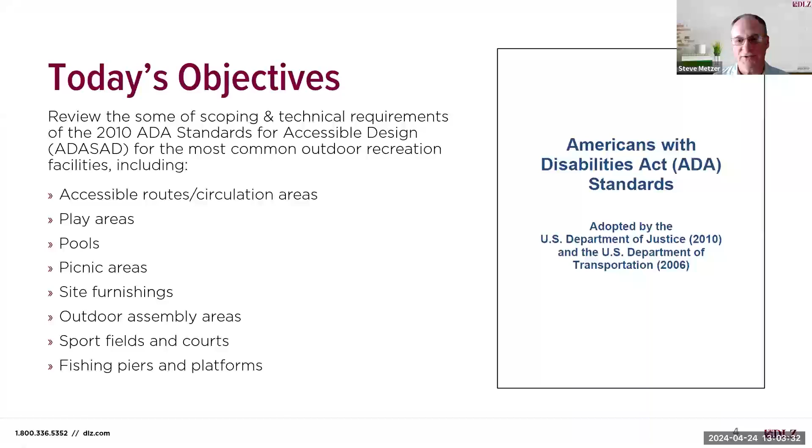A few more items to pass along. Please note that nothing presented should be interpreted as legal advice or binding interpretation of the ADA standards. That's something that we all need to leave up to the regulatory agencies and the courts. However, I am providing my opinion and interpretation based on over 15 years of work in this field.

As noted on the previous slide, no discussion for some of the less common recreation facilities is included, such as recreation boating, amusement rides, golf or miniature golf, and others, which does not minimize the importance of access to those facilities as well, but we do have time constraints. Since each location and conditions at locations vary, the information presented may not fully apply to all situations or any particular situation of one of your locations.

No other requirements that may apply are included, including any state or local accessibility requirements, other than maybe a few instances where I will mention the ICC A117 accessibility code and the sections of the ABA standards that have been adopted, sections 1011 through 1019, for some of the specialized recreation facilities.

Interpretation of the 2010 ADA standards does differ on some aspects, so any questions with potential legal repercussions really should be directed to the U.S. Department of Justice technical assistance staff.

Since our goal should always be to maximize accessibility and opportunities for everyone, I may suggest exceeding, or at least considering to exceed, the minimum requirements at many of the amenities that we'll discuss today, especially where the effort and cost involved is minimal for a large benefit.

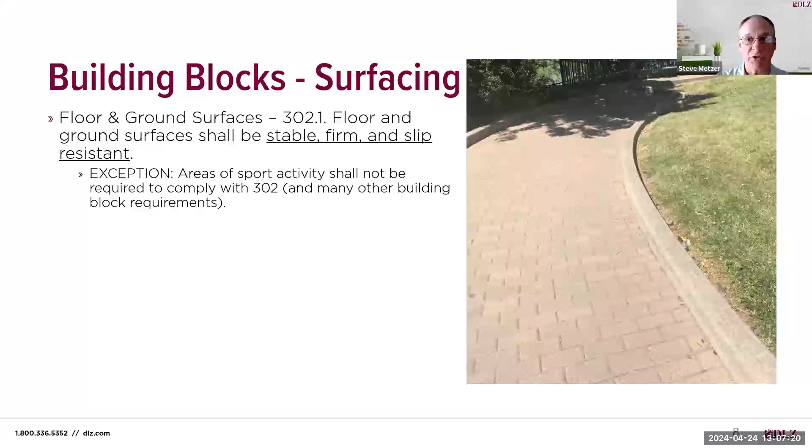302.3 includes requirements for openings in those ground surfaces along accessible routes, which cannot have separations or openings of more than 1/2 inch. Things like joint separations in concrete, cracking, and utility covers are the most common items that violate this requirement and can cause issues for mobility device users especially.

303 provides the requirements for level changes, which are allowed to be up to 1/4 inch maximum if that change is vertical and can be up to 1/2 inch if it is beveled. Elevation changes over 1/2 inch must be ramped and can often be made compliant by grinding a smooth transition.

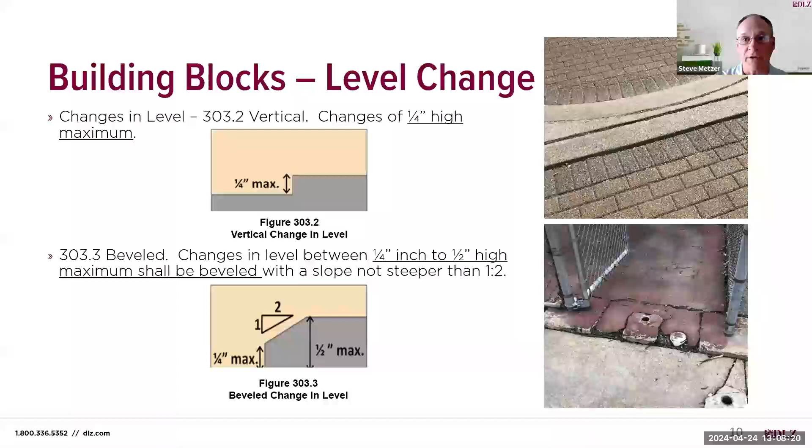While you can get changes in level at any location along an accessible route, they tend to be most common where you transition from one material to another, like from concrete to brick or asphalt. Vertical changes in level can not only be a barrier to wheelchair users, but also be a trip hazard to anyone, including persons that are ambulatory, whether they use a mobility aid or not.

304 includes requirements for turning spaces, which permit especially a wheelchair user to perform changes in direction at various site features. You need to provide either a 60-inch diameter circle or a compliant T-shaped turning space for wheelchairs. If you have ever reviewed architectural plans, you often see this type of circle in especially smaller rooms like family restrooms to demonstrate that there is a turning space provided.

The new ICC building code is going to include a requirement for new construction that increases the diameter to 67 inches. This is being done to accommodate scooters, which are much more commonly used now than wheelchairs, as has been done in the past. And scooters can often have a very difficult time maneuvering within a 60-inch diameter circle.

Existing facilities will be allowed to maintain that 60-inch diameter, but consideration should always be given to trying to maximize access wherever possible for alterations.

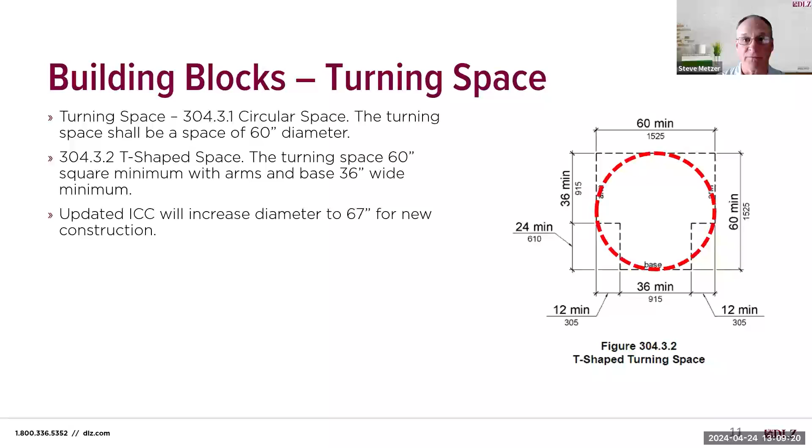305 covers clear spaces, which are required at amenities at nearly every recreation facility to be discussed later, and are essential for amenities to be accessed or reached. Clear spaces are typically 30 inches by 48 inches, but in some locations may be required to be larger, and those will be discussed where applicable.

Clear spaces may be required to be either for a forward or parallel approach, depending on what the feature requires or allows. All clear spaces must be directly connected to a compliant accessible route or circulation area, which includes the earlier building block requirement for surfacing and other aspects of accessible routes that are coming up.

306 covers both knee and toe clearance. Let's start first with toe clearance, which is found in 306.2. Without going into too much detail, toe clearance is typically 9 inches high minimum above the ground for a maximum depth of 6 inches. The depth requirement is 17 to 25 inches and it requires a width of 30 inches. These clearances allow a person in a wheelchair to be able to pull up and use an amenity.

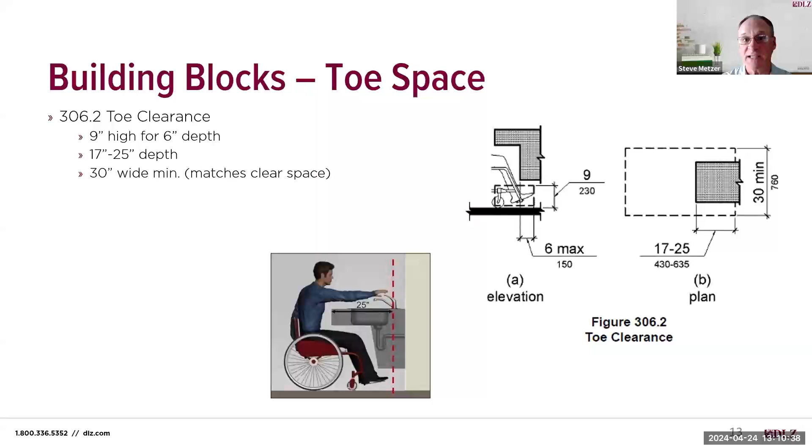You will note that this is one instance where more is not always better, as if you provide a device that is too deep, and in this case over 25 inches deep, the knee and toe space depth may not allow for the operable parts to be within reach ranges.

Knee clearance, which is found in 306.3, mirrors many of the same requirements as toe space, but also includes a minimum knee space depth of 8 inches at 27 inches high and 11 inches minimum depth at 9 inches high. These dimensions all create this odd-shaped polygon you see in the figure on the bottom left.

Again, we see the maximum depth restriction to ensure users can reach operable parts. This restriction often precludes deep sinks like those found at hospitals from being compliant. While the knee and toe space below can be expansive, they are often so deep that it is difficult for a person in a wheelchair to reach the faucet controls.

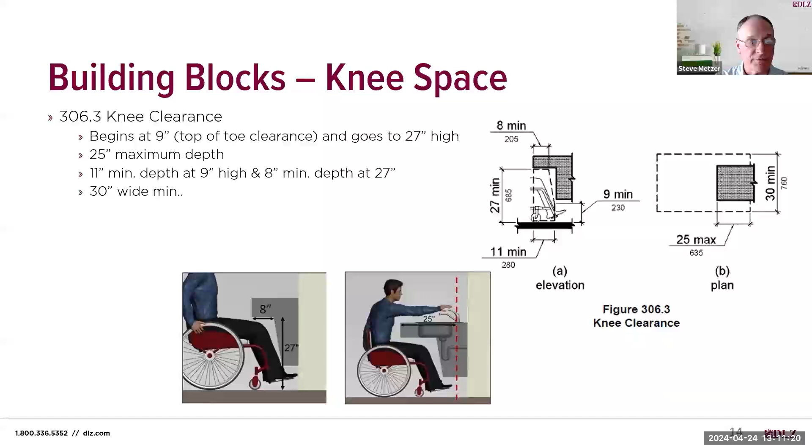307 covers protruding objects. Any object that by definition protrudes more than 4 inches between 27 inches and 80 inches is considered a protruding object and a potential hazard, particularly to persons with vision loss. The requirement is not only along the accessible route, but also within all circulation areas of a site. Some of the most common protruding objects at outdoor facilities include hanging flower baskets, drinking fountains, vegetation overhanging a sidewalk, and similar types of items.

There are separate requirements for post-mounted objects like those found on a sign pole, which are allowed to be up to 12 inches of protrusion. Post-mounted protrusions are much more common outdoors than indoors, but also much more so in the right-of-way than on park sites. Vertical clearance in all locations is required to be a minimum of 80 inches high.

Objects like open staircases or bleachers that are not protected underneath can be a significant hazard if there is no cane detectable barrier to protect the open sides. Fortunately, adding something as simple as a railing or other cane detectable barrier or object to protect those protruding objects or those that lack the minimum vertical clearance is typically fairly easy and low cost.

308 covers reach ranges, which apply to a variety of features on all sites and can be either for a forward reach or a side reach, again, depending on the situation and how the item would normally be expected to be used. Let's start first with unobstructed forward reach, which means the item to be reached can be approached from the front and there is no obstruction to reach over or restrict access.

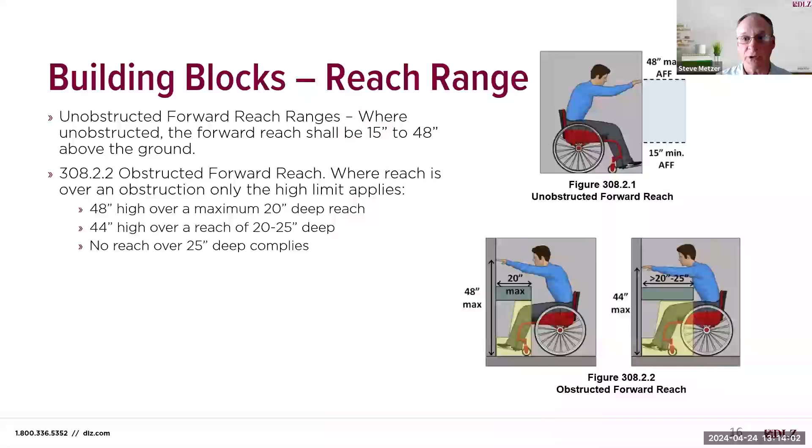Some items may be accessed with a side reach, which has the same 15 to 48 inch height for unobstructed reach, but the side reach over an obstruction that can be up to 34 inches high and up to 10 inches deep, again, does not change that maximum 48 inch reach range. However, as that obstruction starts to increase, being over 10 inches deep and up to 24 inches deep, the maximum reach range permitted is only 46 inches. Items requiring a side reach cannot be placed at locations with over a 24-inch deep reach.

Here's a good example from a recent evaluation I did. It's pretty common. This apartment complex allows pets and has many trash receptacles and dog waste dispensers on the site, all at the same location. But many of them are not usable since they are located in grass areas, which is not a compliant surface as we talked about earlier, not being firm, stable, and slip resistant.

While the trash can height meets the requirements for reach range height, the bag dispenser operable part is at 50 inches high. Both the dispenser and the trash that are located on that same post are over 42 inches away from the sidewalk, which exceeds the 24-inch maximum for side reach from the sidewalk. A person in a wheelchair with a dog or even a service animal would not be able to access either the dispenser or the trash can in this location.

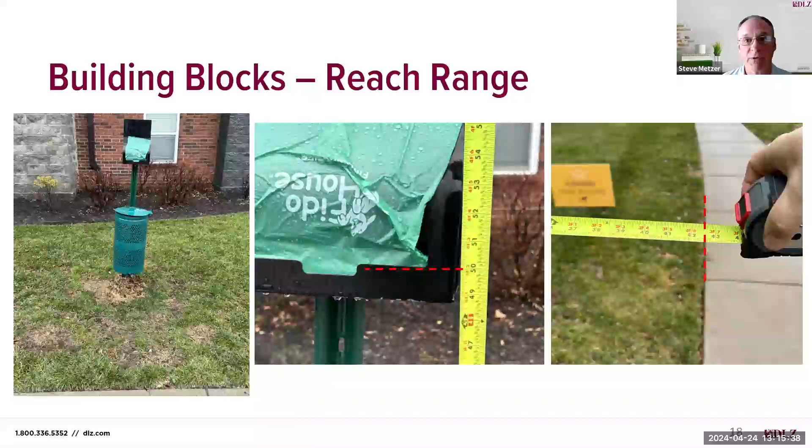There really is no reason why these items should not be corrected by moving that post to be within 24 inches of the sidewalk and also lower that dispenser to be at 48-inch maximum height if it reaches the unobstructed criteria, or 46 inches if it does not.

The last building block of Chapter 3 is Section 309, which includes requirements for operable parts. The requirement for operable parts of amenities is that they cannot require complex hand movements and must be operable with one hand. Complex hand movements are generally defined as performing multiple actions with that same hand, such as grasping and twisting, or grasping and pulling or lifting. Perhaps the best test of compliance of operable parts is to try to operate the item with a closed fist. This would simulate someone with an upper body mobility issue like arthritis or something similar, trying to operate that part.

In addition to the type of operation required, the force required to operate a part cannot exceed 5 pounds. The most common operable parts issues are with round doorknobs and faucet controls that require grasping and twisting, or vending machine controls that require tight grasping and pulling of a knob to dispense product.

For outdoor recreation facilities, one of the most common non-compliant operable parts that we see are latches at gates to aquatic facilities, whether to the perimeter of a pool or to a child's wading pool area. The required grasping and lifting operation violates the requirements of 309 for operable parts in most cases. This can usually easily be fixed by switching out the knob or by adding a small bar or lever that can be lifted with a closed fist.

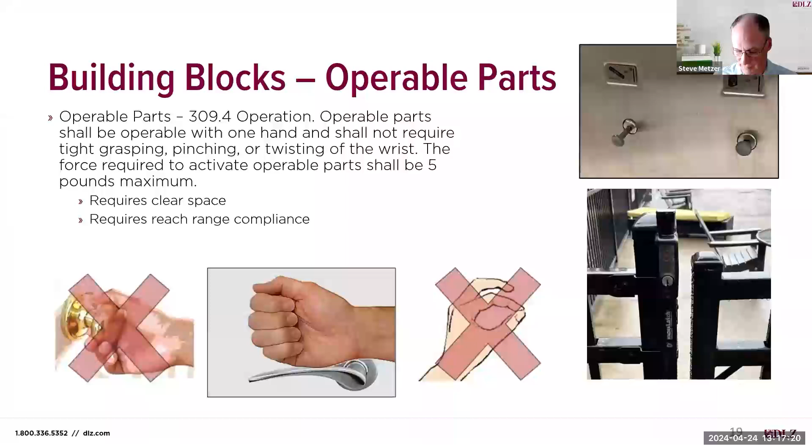In addition, at least one of each item on all sites must be also connected to an accessible route, and often more than one is required to be on an accessible route. And I'll talk about each one of those on a case-by-case basis. One of the most common issues we see on park sites is non-compliance with 206.2.12, which requires at least one accessible route be directly connected to both sides of the court for court sports like basketball, tennis, and pickleball, and also a lack of accessible routes to many sport field perimeters.

Here's a good example of a smaller park that provides all the required accessible routes. This site includes the community center with parking lot and connection from the parking and the community center to the right-of-way sidewalk, perimeter walking path and benches, play area, and boundary of both the tennis courts and the one basketball court on the site.

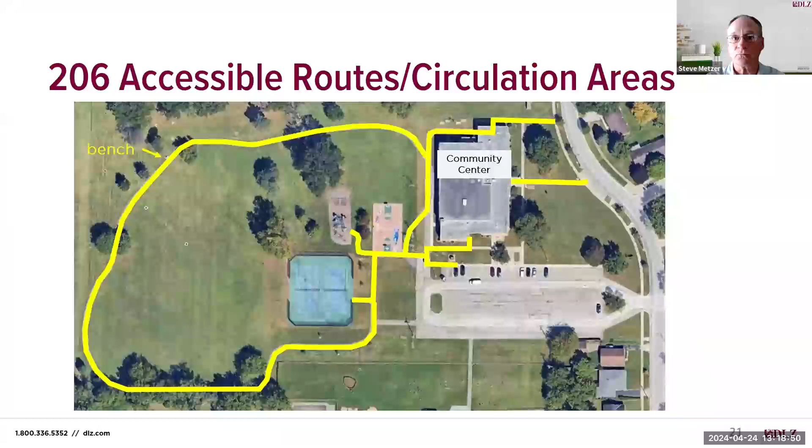Here's another not so good example of a much smaller park that provides none of the required connections other than the short interior path to the right-of-way sidewalks that bisects this park. There is no connection to the boundary of either one of the two play areas, the covered picnic shelter, the benches near those play areas where a parent would sit and watch their children play, or the drinking fountain on the site.

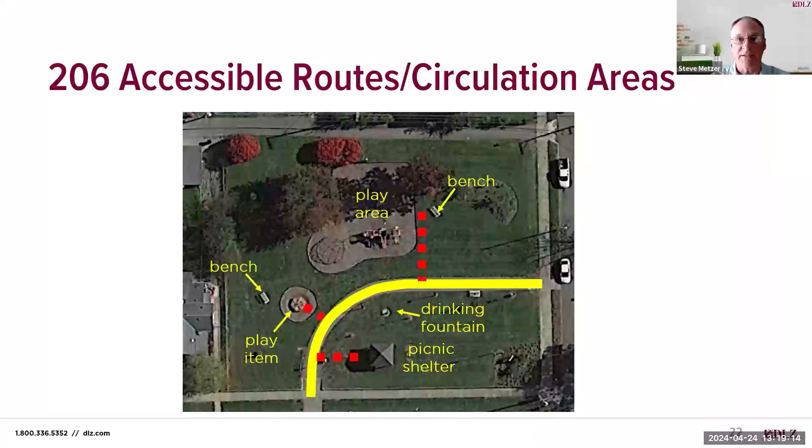Walking surfaces of accessible routes need to be a compliant surface, if you remember the firm, stable, slip resistant building block, and has limits for running slope of 5% maximum, cross slope of 2.1% maximum, with no level changes, have a minimum clear width of 36 inches, and a passing space that's 60 inches wide every 200 feet.

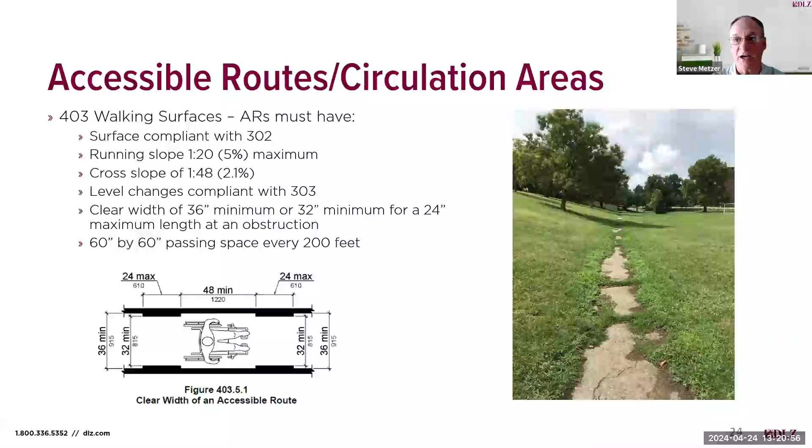There is an allowance at some obstructions to narrow the accessible route to 32 inches in width, but only for a 24-inch distance. The new building code is going to include a requirement for 48 inches of width for accessible routes for new construction. We're not quite sure yet if that's going to apply to exterior sites, but I assume it will, so continue to watch for more information to come on that issue, and when it is published, I will certainly pass that along.

Okay, let's get to the first specific type of recreation facility, and one that is found in some way at nearly every park: play areas. The ADA standards require in 206.2.17 that play areas comply not only with all provisions of Chapter 4 for accessible routes, including all the slopes and surfacing and level changes that I've covered in the building blocks, but also that at least one accessible route be provided to the boundary of and within the play area.

There are some modifications to the accessible route required by 1008.2, including 1008.2.4.1, which requires that within a play area, the ground level accessible route is required to be 60 inches in width to provide that turning space building block. So if you think about a child that would travel from one play amenity to maybe a swing, if you don't provide a 60-inch width, that person may not be able to utilize the ability to turn and go to another play component. So that's why the 60-inch width is required within the play area.

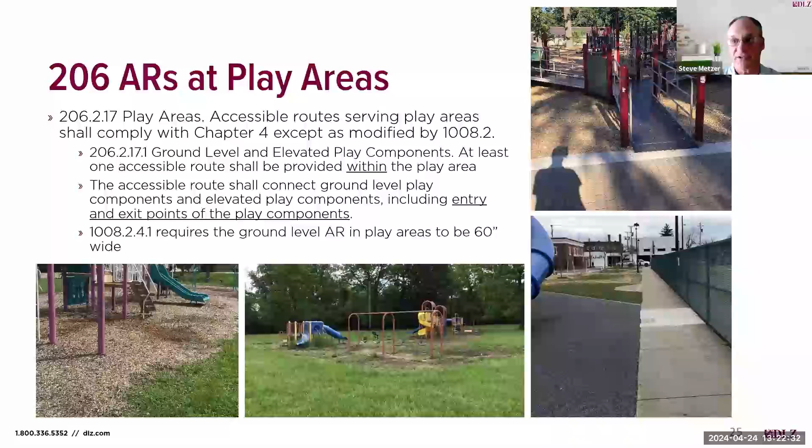As we dive deeper into play areas, I want to ensure that we're all on the same page related to a couple of the common terms. First is play component, which is simply just that, something used for play, socialization, or learning, and which can be either manufactured or natural, standalone, or part of a play structure. Play components don't include some of the construction features like the transfer system or steps or decks or roofs or ramps or bridges or anything structural in most cases.

A ground play element or ground level play component is a play component that is both approached and exited at the ground level. Elevated play components are approached either above or below grade and are part of a larger play structure that consists of 2 or more play components. So the slides that follow will hopefully clarify those differences and make it a little bit more apparent of what qualifies as either a ground or an elevated play component.

Within the play area, there are also often a number of use zones, which is the ground level area beneath and immediately adjacent to a structure or play equipment that is designed for circulation around that equipment and where it is predicted that a user would land if they were to fall or exit from the play equipment. These use zones typically are required to provide a surface that protects anyone that may fall and also often be an accessible surface.

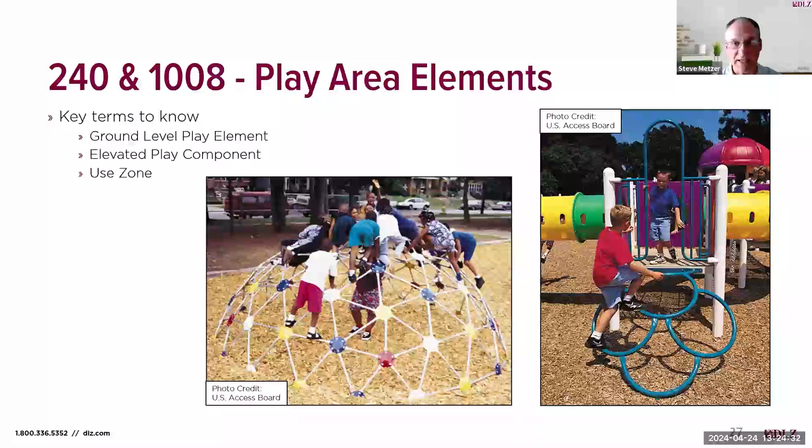Note that play areas designed specifically for children under the age of 2 are mostly exempt from the standards. It's assumed that parents or other adults would assist children of that age, but it certainly is still best practice to try to provide accessible surfaces to the greatest extent possible, even in those exempted areas.

The standards apply to each and every separate play area. When evaluating those areas with play equipment, play areas should be considered separate if they are either designed for different age levels or if they are geographically separated on a site and not directly connected in any way. While you can focus your accessibility efforts on one play area at a time, ultimately your goal needs to be full compliance at all play areas.

We strongly recommended that this client consider reconfiguring their park to consolidate the play items into fewer different areas and allow for better compliance with accessibility requirements for the numbers and types at each location. By doing so, they would also open up some open space that they could use for other items at the park for adults and other users of that facility.

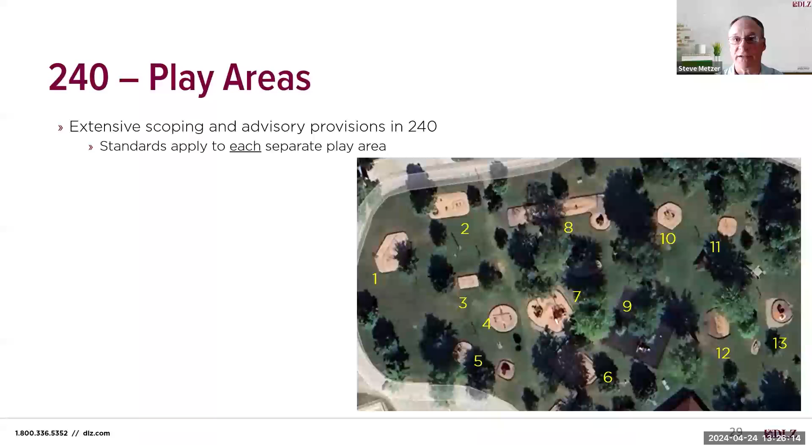The ADA standards reference a number of very important standards of the American Society for Testing and Materials related to both safety and accessibility. I'm not going to cover those in detail other than to state that they are a requirement and that there are very few surfaces that can meet the requirements for both fall safety by being soft and accessibility by being firm, stable, and slip resistant, as we've talked about.

Engineered wood fiber can meet both requirements and is less expensive than poured rubber, but it requires regular maintenance to maintain accessibility, sometimes as much as weekly or maybe even every couple of days. Surfaces like regular mulch, wood chips, shredded rubber tires, pea gravel, and many others that we see used do not meet one or both of the requirements for either safety or accessibility.

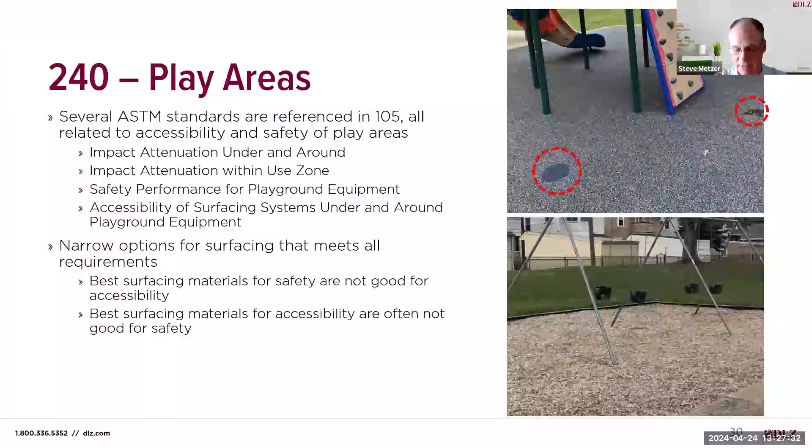To ensure equal opportunities for all abilities, Table 240.2.1.2 includes the requirements for the number and types of ground play elements required to be provided and located on an accessible route, which is based on the total number of elevated play components. This is to ensure that children who might not be able to use a transfer system, or if there's no ramp available, would still be able to interact with other children and play at the ground level.

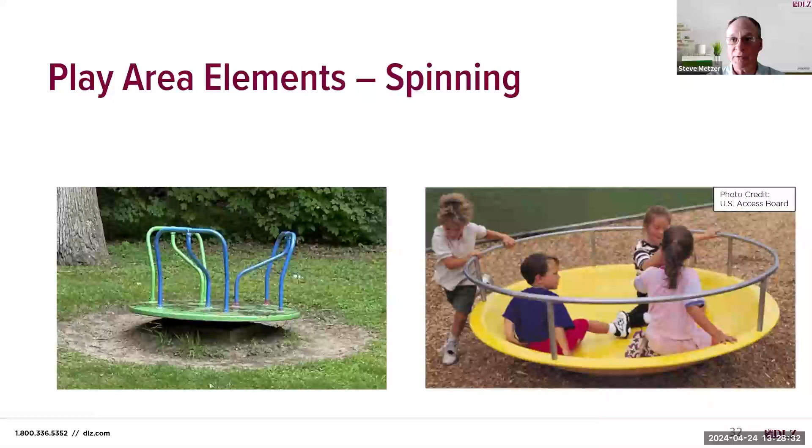You will note that the table includes both the total number of ground components and the number of different types. Let's talk about the types, and while we do that, keep in mind that some of these can be used as either ground or elevated, depending on how they are entered and exited, as we talked about earlier with the climber. When talking about the types of play elements, they are typically identified by the experience that the component is designed to provide. Examples include spinning elements, which come in a wide variety of types.

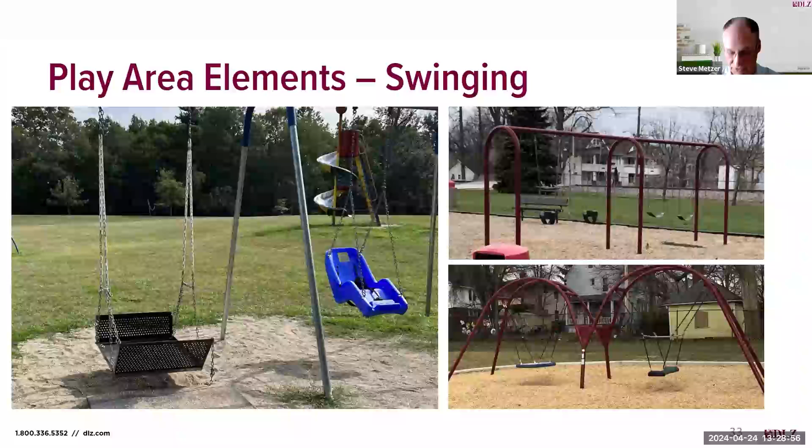One that is almost always provided are swinging components, whether a typical swing set or other types of swings. There are also swings intended for use by a child in a wheelchair, as shown in the left photograph. That front panel folds down and the size of the platform accommodates a child in a wheelchair and allows a parent or guardian to push the child right in their wheelchair on that swing.

Slides can be either ground or elevated play, again based on where they are entered and exited from. The type of slide does not matter, so a straight slide or a spiral slide are both simply slide play element types. All kinds of climbing play items are available and can be either ground level or elevated elements. A variety of rockers are also common, and nearly all of those are ground play elements that can help you meet both your number and type of ground play elements that are required.

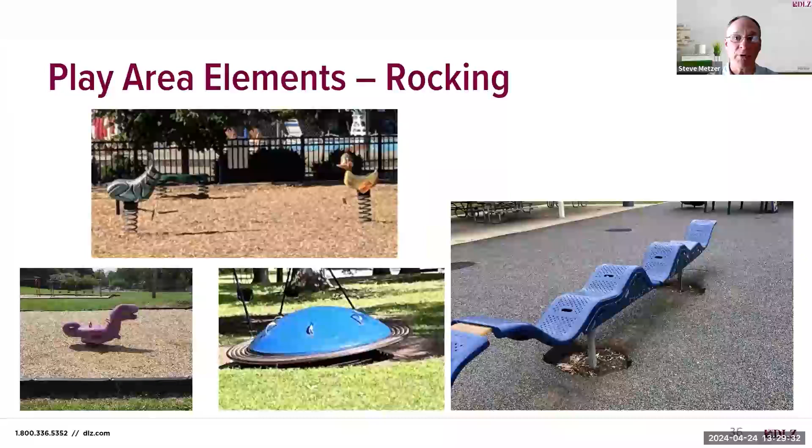Another common ground play element type are balancers, which can apply to all age groups, even senior citizens, and can also be elevated on some large structures. Perhaps one of the often overlooked opportunities for play are those elements that are educational and provide sensory, learning, some type of a table or role-playing opportunity. These are also common as both ground and elevated play elements. And there are a wide variety of other types, such as diggers and tunnels and rollers and others. Diggers and rollers are generally ground play, but a tunnel could be either type.

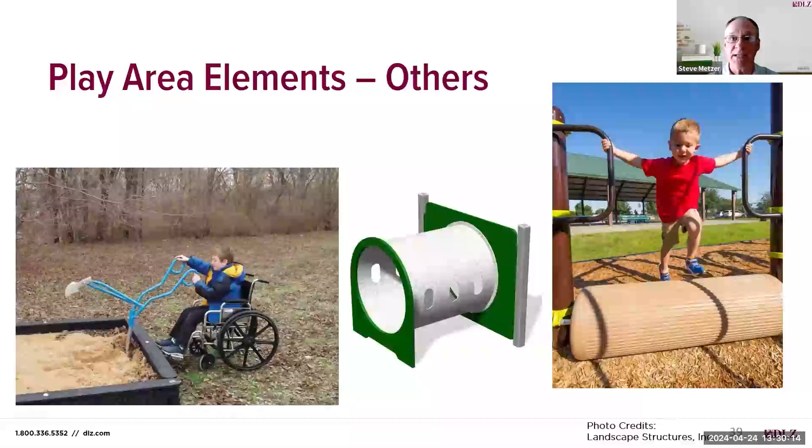It is important to note that regardless of how many and what types of elements you have, at least one of each type of ground play element must be on that compliant accessible route with proper surfacing. For many ground play elements not near a play structure, the surfacing can generally be more accessible and have fewer concerns about fall safety, but there are some ground play elements where that is still an important consideration. One thing that we're starting to see much more commonly is the use of natural play items, which simulate nature and can be of various types as well, as shown on the slide here, with simulated rocks and logs and rivers.

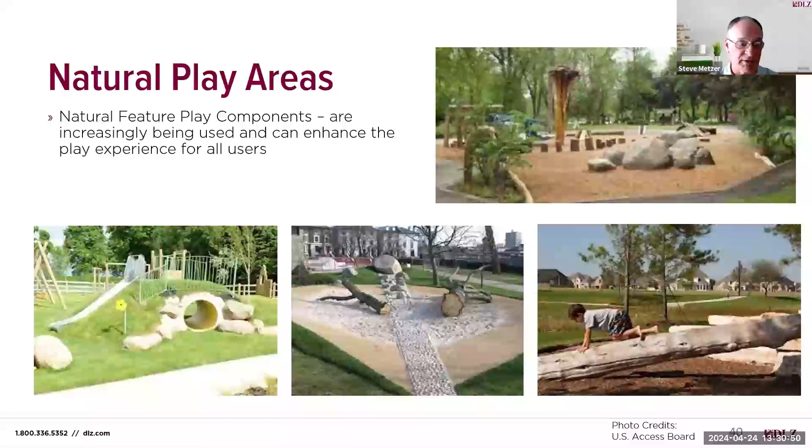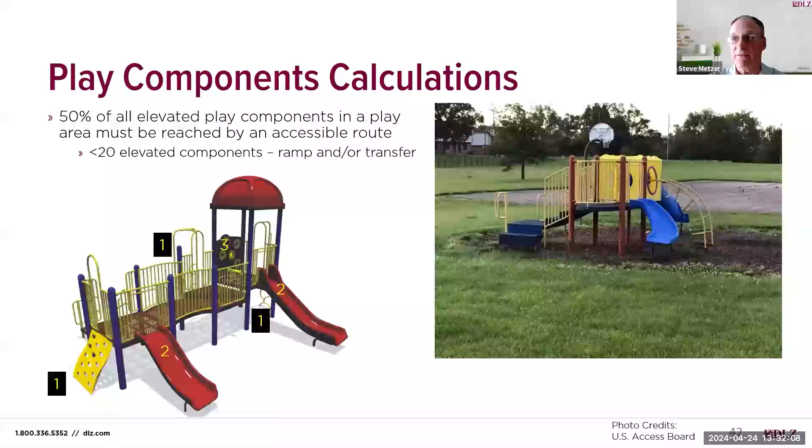There's no similar table for elevated components. It's simply that 50% of all elevated play components must be on an accessible route if there are fewer than 20 on the structure, with that route being either ramps or a transfer system of platforms and steps. For our play structure from the previous slide, since there are 6 total play elements, at least 3 must be on the elevated accessible route. And for that example, all of them are, so we meet the requirements.

When you get to those really massive play structures that have 20 or more components total, not 20 types, but 20 total elements, you have that same requirement for the elevated accessible route to connect 50% of the total, but that needs to be split to include access to 25% by ramps and up to 25% by transfer or ramps. Ramps are always better.

So for the play structure pictured, let's assume there are 24 total elevated play elements. 50% of the 24 are required to be on an accessible route, so 12. Of those 12, a minimum of 6 must be accessible by ramps. The other 6 could be accessible by ramps or by transfer platforms and steps. Essentially, you could have all 12 of them accessed by the ramp to comply if you so choose, but you could not have less than 6 of them accessible by ramps.

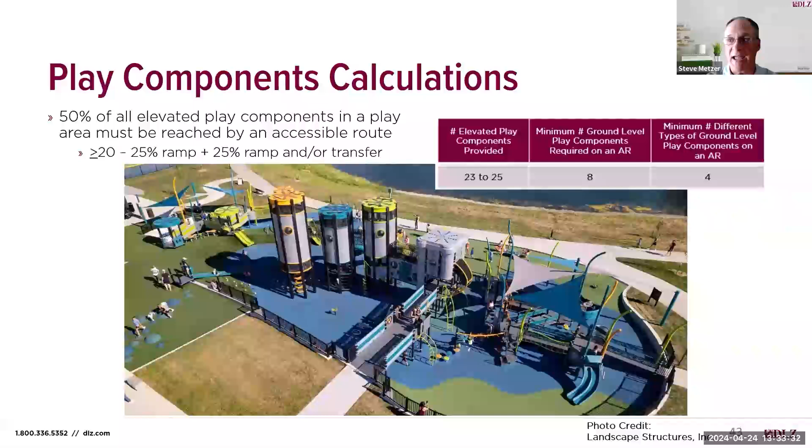Based on the table, that number of elevated play components would require this play area to provide a total of 8 ground play elements of 4 different types. On these large types of play structures, there's almost always a multiple number of ground play elements on the structure itself, but you can also see that there are some separated swings and slides and some other things that would help you get to that number of 8 elements of 4 different types.

I have mentioned both ramps and transfer systems as requirements for access to elevated play elements. Let's now cover the requirements of those fairly quickly. Ramp requirements are pretty straightforward, so I'll cover them first. Ramps connecting to elevated play areas must be 36-inch minimum width, have a slope of 1/12 or 8.33% or less, and cannot have a vertical rise for each run of more than 12 inches.

They must provide handrails, and those handrails must be circular and be between 0.95 and 1.55 inches in diameter. And the top of the gripping surface of those handrails above the ramp must be between 20 and 28 inches. Handrail extensions, as required on most ramps within the ADA standards, are not required for play structures.

The other type of permissible access are transfer platforms at the ground level and steps above that. Transfer platforms are required by 1008.3.1 to be at least 14 inches deep and 24 inches wide and be 11 to 18 inches above the ground surface. The actual shape of the platform can vary, but it must have the required 14-inch depth and 24-inch width dimensions.

Our building block clear space of 30 inches by 48 inches that we talked about earlier must be provided immediately adjacent to the transfer platform and have the 48-inch long section centered on and parallel to the 24-inch transfer platform dimension. There must also be at least one means of support for transferring, which is typically some type of a vertical bar or bars or a D bar.

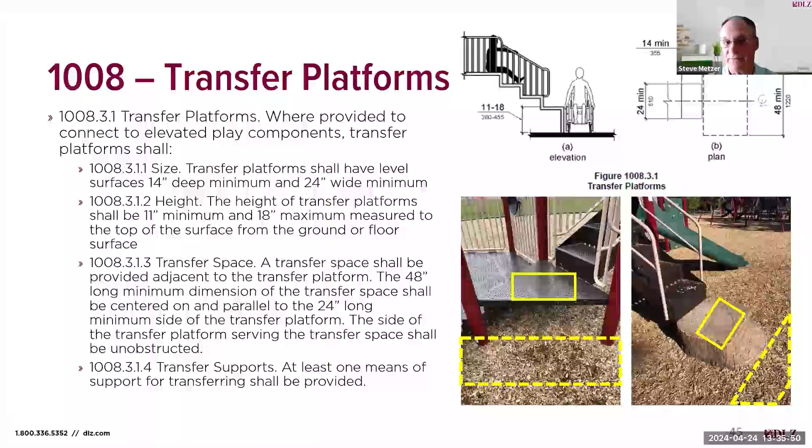The photo on the bottom left shows the location of a compliant 14 by 24-inch transfer platform on that triangular platform and the adjacent and parallel clear space with transfer support bars that fully complies. The adjacent natural log transfer platform on the right photograph has a compliant size as well at 14 by 24 inches, but it does not have that clear space immediately adjacent to the platform and also does not have the support bars within the reach range for the clear space. So this bottom right natural log transfer platform is not accessible to a child trying to utilize it.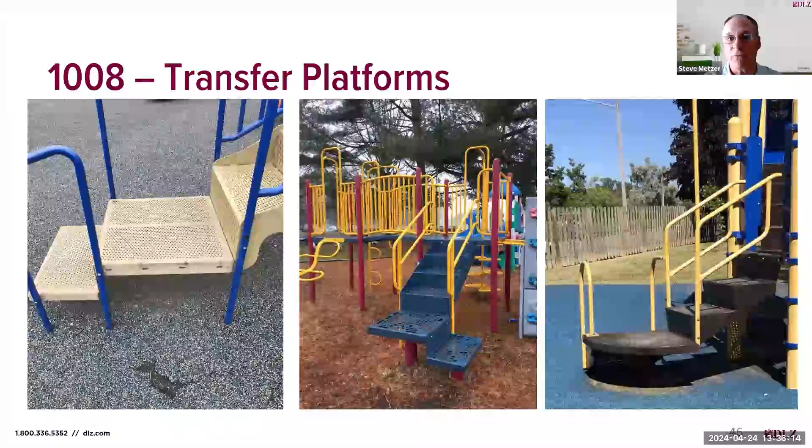Transfer platforms can be a wide variety of configurations and shapes, but all must have compliant clear space dimensions and components. Surprisingly, there are a fair number of play structures that do not provide any transfer platforms and have only steps, which can work, but they're not nearly as accessible as having a platform that leads to steps. Once a child is transferred to that platform from their wheelchair, they need to be able to keep transferring to the play level using the series of steps.

Each step is required to be the same size as the transfer platform at 14 inches deep and 24 inches wide. But each step cannot be any higher than 8 inches, and those transfer supports are required as well. Those are typically the vertical bars on the railings, but sometimes they are separated and standalone transfer supports.

This photo shows a really good example of a lower transfer platform that meets all the requirements with the larger platform at the change of direction to get from the platform to the steps. All of them have transfer supports, and then as they go up the steps to the upper level, you can also see the railing or handrails that are used for transfer support.

There is a requirement for at least one turning space on the same level as accessible play components for elevated play components, which would allow a child in a wheelchair to turn around and get off the structure via the ramp.

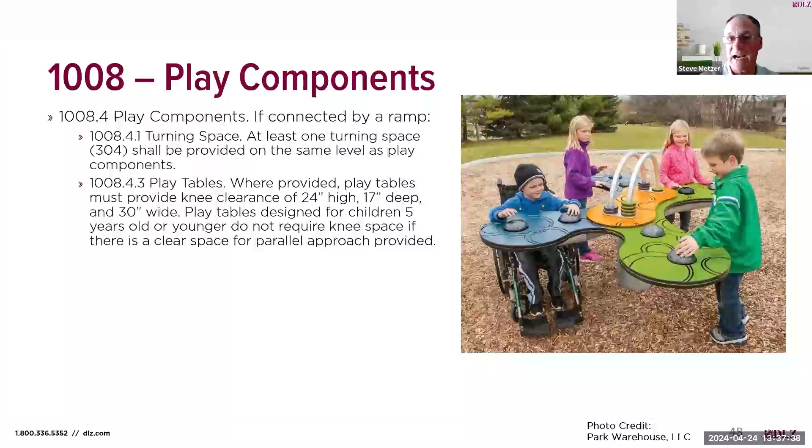Where provided, play tables, like the one shown in the photo, must provide knee clearance that is at least 24 inches high, 17 inches deep, and 30 inches wide for a child in the wheelchair to use. If the play table is designed for children that are 5 years of age or younger, it does not have to provide the knee space, but there must be a clear space immediately adjacent to the table.

Splash pads are basically ground play equipment with water, with few having anything elevated, but there are some exceptions. If there are elevated components and you have a splash pad, you should evaluate that splash pad in the same manner for the number of required ground and elevated play elements on an accessible route as you would for regular play equipment. Ensure accessible routes are compliant to both the perimeter of the pad and within the spray pad area, but do note that the slip resistant requirement is not required to be met for splash pads. So now that we've smoothly transitioned to the aquatic environment, let's move on to the next type of facility, pools.

The scoping requirement for swimming pools are found in 242 and requires at least 2 accessible means of entry be provided for swimming pools with 300 linear feet of perimeter wall. Of those 2 accessible means of entry into the pool, at least one must be either a lift or a sloped entry. So every pool must have at least one of a lift or sloped entry.

Today I'm only going to discuss, of the 5 types of allowable accessible means of entry into a pool, the pool lift, the sloped entry, and pool stairs, since lifts and sloped entries are required as one of the 2 accessible means of entry, and pool stairs are the most common non-lift or sloped entry means of access into a pool. Transfer walls and transfer systems won't be discussed since they are not common, but they are allowable as that second means of entry into a pool if you so choose. And if you have those and would like to have more questions about that, please feel free to send me an email and some photographs so we can talk about what they do from a compliance standpoint at your location.

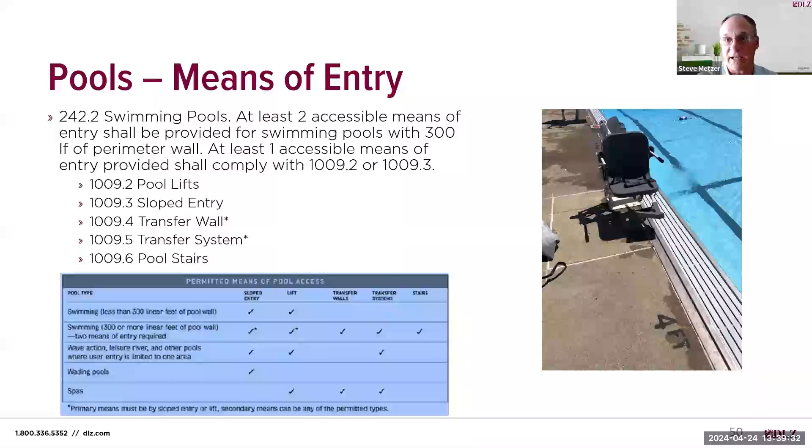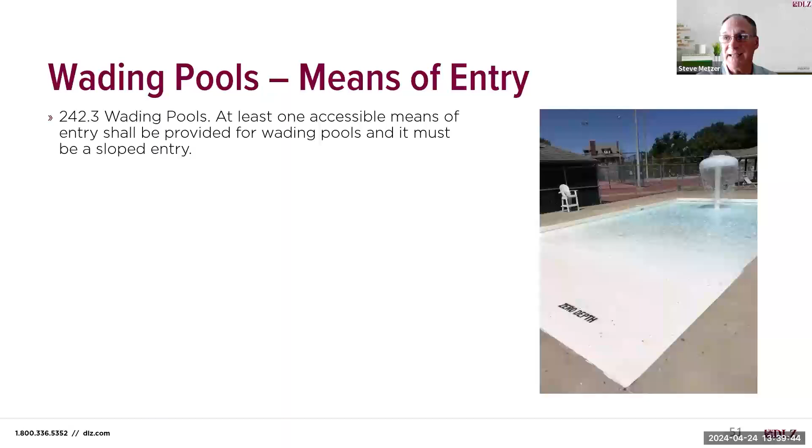All wading pools are required to provide access, and that access must be via a sloped entry. Wading pools are typically provided for use by toddlers and small children and have limited water depth. There are some special pools which are exempt or have different access requirements. Pools like wave action pools, leisure rivers, sand bottom pools, and others that have limited access at only one location are not required to provide more than one accessible means of entry. That accessible means of entry must be either a lift, a sloped entry, or a transfer system. Most commonly, we see sloped entries.

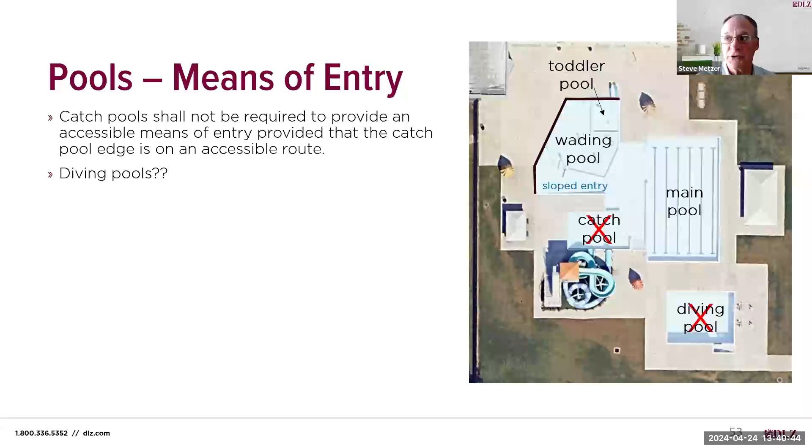Catch pools, which are defined as a pool or section of pool that is at the end of a water slide, are not required to provide an accessible means of entry, but that catch pool edge must be located along an accessible route. While not specifically mentioned in the standards, I think that same logic holds true for diving pools. Since the use is entered above the ground level and the pool is entered from above the pool deck, it seems appropriate that diving pools would also be exempt, but would also be required to be on an accessible route.

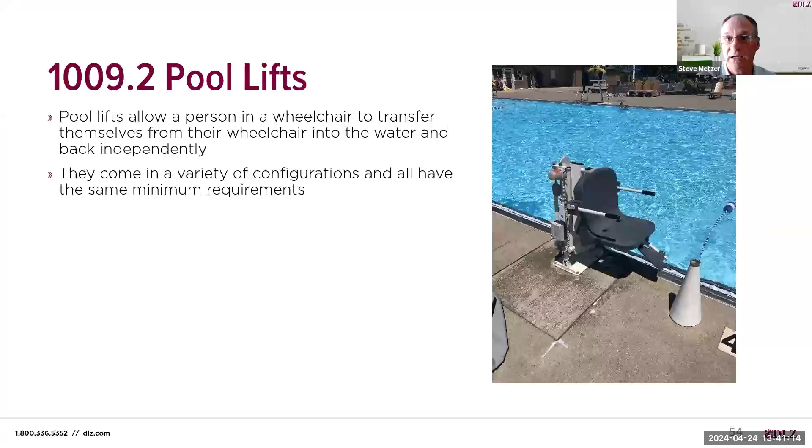So let's discuss pool lifts, which are designed to allow a person that uses a wheelchair to transfer from that wheelchair to the lift seat, use controls to swing themselves over the pool and into the water, where the seat remains until they're done swimming. Once they're done, they swim back up to the seat, get on, and use those same controls to lift themselves out of the water to their wheelchair, where they then transfer again. There are many different configurations of pool lifts, but all have the same minimum requirements.

Pool lifts must be located on the perimeter of the pool, where the pool level does not exceed 48 inches of depth, unless the entire pool exceeds 48 inches of depth, and then it would be allowed to be anywhere. If more than one lift is provided, only one of those lifts needs to be located at the 48-inch maximum water depth. And it is strongly encouraged that if you have multiple types of entry required, that you diversify.

Just because two means of entry are required into a pool, and both could be lifts, lifts do not necessarily work for all different types of disabilities and swimmers with disabilities that might want to enter the water. We and the Access Board certainly recommend that you consider multiple types.

The seat is required in the raised position to have the center line located over the deck and be at least 16 inches from the edge of the pool. On the side of the seat opposite the water, a clear space is required that exceeds our normal clear space. This one is required to be 36 by 48 instead of 30 by 48. And that clear space needs to be parallel with the seat, with the 48-inch side of the clear space beginning from a line located 12 inches behind the rear edge of the seat.

This is the typical type of transfer arrangement that someone in a wheelchair would have, that's also found at transfer showers inside of buildings. The clear space on this side of the seat is required to have a slope no steeper than 2.1%. The seat's required to be 16 to 19 inches above the pool deck, again, to accommodate that transfer from the wheelchair to the pool seat, and the seat is required to be at least 16 inches wide.

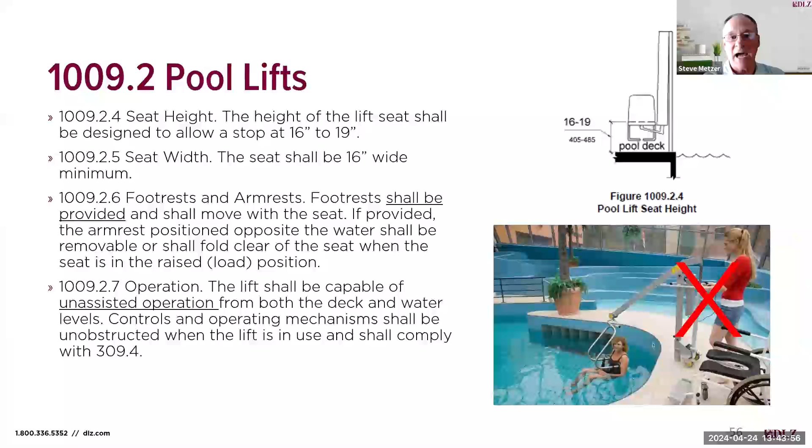All lifts must provide a minimum of 18 inches of submerged depth within the water from the top of the seat to allow the person on the seat to get into the water without having to lean over and jump or splash out, and also be capable of handling a capacity of at least 300 pounds. While pool lifts have greatly improved over the years, they really are the best and maybe only way for someone in a wheelchair to access a pool, other than what I'm going to talk about next with certain circumstances.

That second option you have for one of the two primary accessible means of entry into a pool is use of a sloped entry. 1009.3.1 includes the requirements for sloped entries, which are basically underwater ramps. Sloped entries must have a slope not exceeding 8.33% and cross slope not exceeding 2.1%.

There is a requirement for that bottom level landing to extend to a depth of 24 to 30 inches below the water level. You are allowed to have additional landings, but you must have one landing at the bottom of your ramp runs in the sloped entry at 24 to 30 inches of depth. For wading pools, as we talked about earlier, the sloped entry and landings are required to extend to the deepest part of that wading pool.

Sloped entries are required to provide handrails on both sides, and they must have a clear width between them of 33 to 38 inches and a height to the gripping surface of 34 to 38 inches above the pool bottom. No handrail extensions are required at the bottom landing, but they are required to be 12 inches at the top and parallel with the ground surface. It's important to note that wading pools do not require handrails.

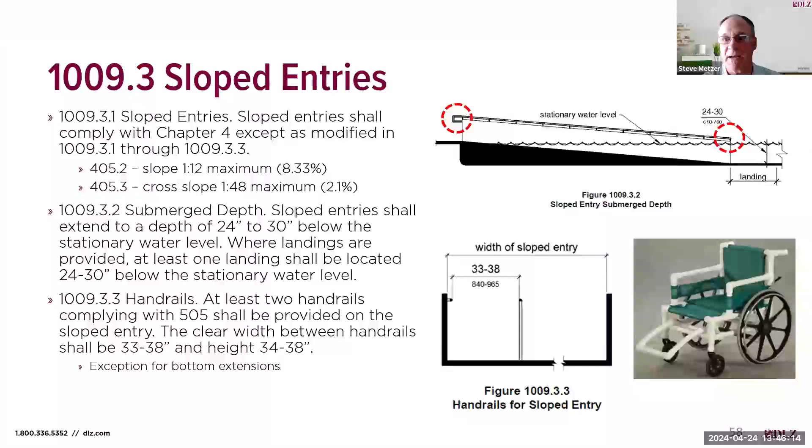Since most personal wheelchairs and mobility devices are not typically appropriate for being submerged in water, you can increase accessibility by providing an aquatic wheelchair, which is made of a non-corrosive material and designed for access into water. Again, this is not required, but if you do not provide a lift, you might want to consider purchasing an aquatic wheelchair for use in combination with your sloped entry. I looked online and have found a variety of different types that range in cost from under $1,000 to several thousand dollars, depending on the style and type.

As I mentioned earlier, the most common second means of accessible entry into a pool that's not a lift or a ramp is pool stairs. Pool stairs are usable only by ambulatory persons, and most pools have many sets of stairs that can also be used by swimmers with a mobility impairment, even though they do not meet the requirements I'm going to cover now.

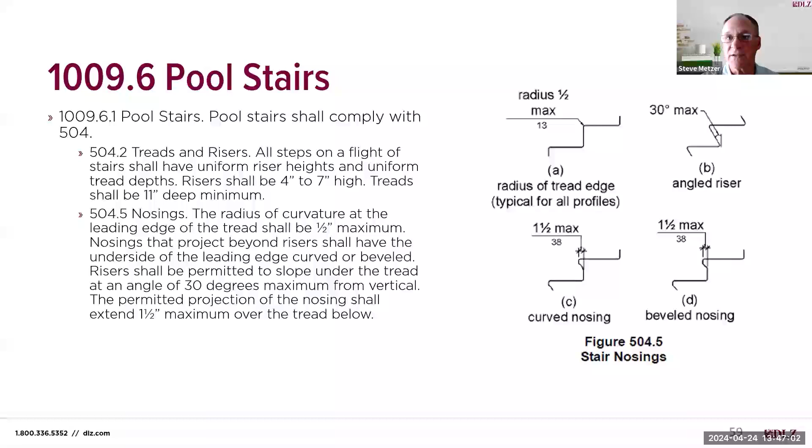Accessible pool stairs have specific requirements for the riser height, nosing radius, and angle. I'm not going to discuss them in great detail, other than to say that if you're considering purchasing a set of portable pool stairs, be certain that they comply. We do see these types of pool stairs being purchased that often exceed the 30-degree maximum angled riser, which would be very difficult for some ambulatory disabled users to utilize.

Accessible pool stairs are required to provide handrails on both sides, and those handrails must have a clear width between them of 20 to 24 inches. Similar to sloped entries, extensions are not required at the bottom, only at the top, and must meet that same 12-inch length and be parallel to the deck surface as the handrails on the sloped entry.

The next feature to discuss are picnic areas, which I'm going to lump together to include picnic shelters and all the items that are typically included, such as picnic tables, grills, water sources, and other items. Let's start first with picnic tables, which are a dining surface under 902. Dining surfaces must provide a clear space for front approach and knee and toe space beneath, with the top of the dining surface being 28 to 34 inches high.

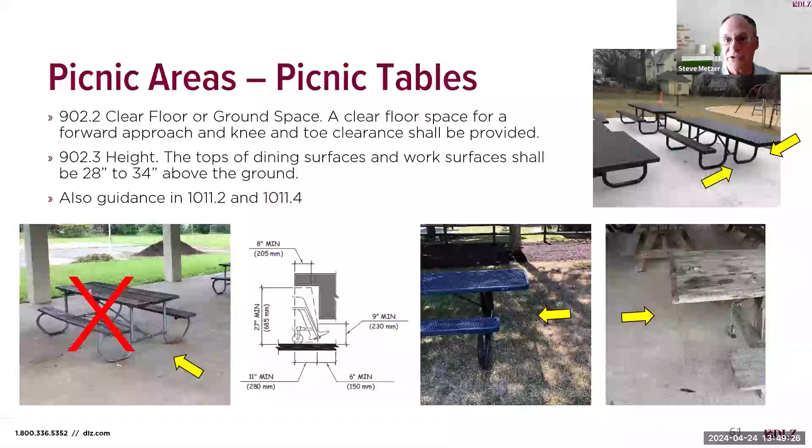The two on the bottom right have short extensions that provide an accessible space on the end, not on the side next to the bench, but on the end, with the upper right table having two spaces and maybe even three with that clear space on both sides and the end with compliant knee and toe space below. So choose your model wisely as you determine how many compliant wheelchair spaces you need at your picnic shelters.

Oh, I'm going the wrong way, sorry.

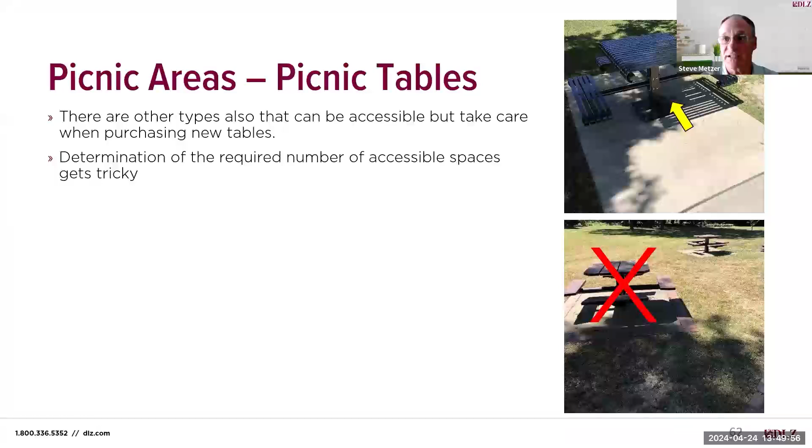To determine the number of accessible spaces required, you need to measure the perimeter of the usable area of all tables at a shelter. 1011.4 requires one accessible space for every 24 feet of usable table area perimeter. Usable would be determined by how the tables are arranged, based not on your failure to place them with a compliant approach or clear space, but rather how they are usable by everyone. So let's do some quick math.

On this pool deck dining shelter on the right, there are 6 square tables with 4-foot sides, giving us 16 feet of usable perimeter per table and a total usable perimeter at these tables of 96 feet. With the requirement of one wheelchair space for every 24 feet of perimeter, this shelter would need to provide at least 4 accessible spaces, but only one is provided. You can see here and from the next example the importance of assuring that once you have determined how many accessible seats you need, you purchase a truly accessible table.

Let's look at another that might be more common with rectangular picnic tables. It might be difficult to see entirely with the shade under the shelter at the time that I took the photograph, so you'll have to just trust my numbers. This shelter provides a total of 19 tables. There are 3 rows of 6 rectangular tables that are 6 feet long.

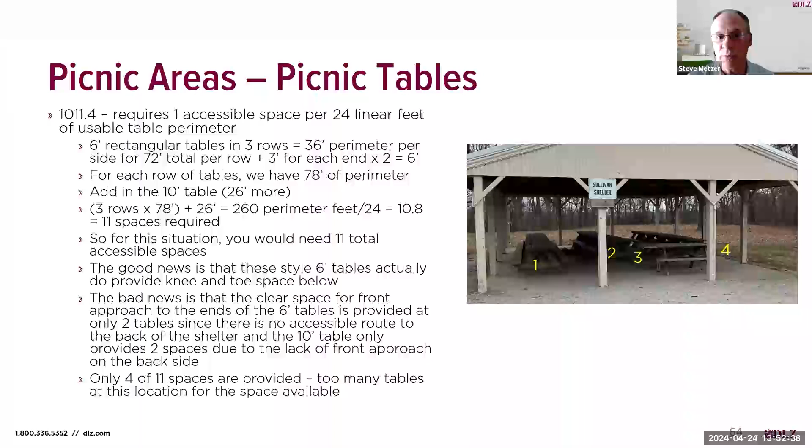Dividing that 260 by 24 gives us a requirement for 10.8 accessible spaces, which is rounded up to 11. This shelter only provides 4 of the 11: 2 of them on the end on the left and the one in the middle row, and 2 spaces at the end of the 10-foot table. There is no accessible route to the far side ends, and there's not enough room between the tables to get any other accessible spaces. So this demonstrates the fact that the presence and number of accessible wheelchair spaces is often an issue at picnic shelters.

I wanted to use that last example to demonstrate what I see as one of the most common errors made, trying to cram in too many tables within a shelter. In shelters that have good circulation spaces and most ends have an approachable clear space with knee and toe space, it's much easier to meet the requirements than it may seem.

You really need to consider the style of tables you have, ensure the ends meet knee and toe space requirements, and proceed from there. Ensure the placement, orientation, and configuration of your picnic tables can meet the needs for your disabled users. Ensure that once you have determined how many accessible seats you need, that you purchase a table that can help meet those requirements.

All your good work to provide accessibility can easily be undone if tables are not secured in place and users can move them around, and I know many clients that have this problem. I realize that many of you also have some very high use pavilions and you may need that quantity of seating, but as you can see, it isn't without potential repercussions.

I often suggest and would suggest to many of you today that you evaluate your shelters and publicize which ones provide accessible spaces and the number of accessible spaces, to be proactive in letting your public know which shelters may meet their needs when they rent those facilities, if you allow them to be rented. You might also want to think about including information about their needs on applications so that your staff can customize the layout based on their known need for wheelchair spaces. I could go over dozens and dozens of layouts and calculations, but obviously we don't have time for that.

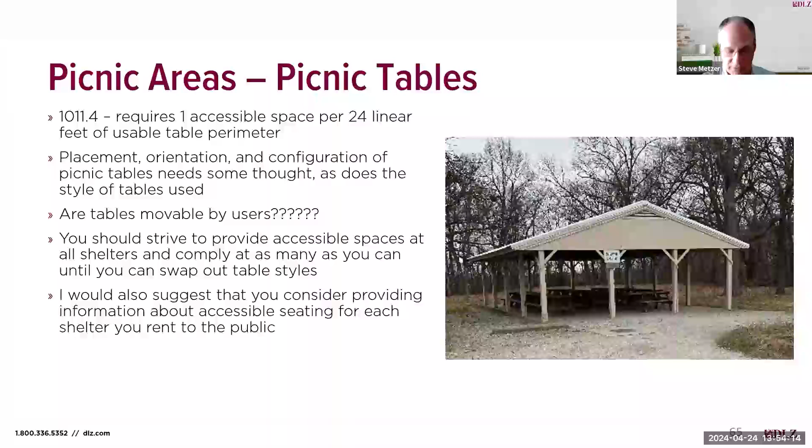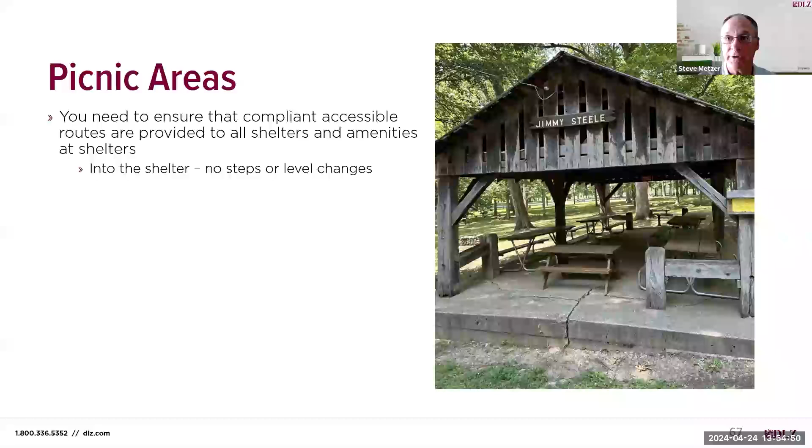If you do have a route to the perimeter of the shelter, ensure that you have access into it as well. Having a step or other vertical change is a barrier and a higher priority to correct, again, than having the picnic tables within be accessible. If you do have both a route to the perimeter and into the shelter, you need next to ensure that you have a compliant route within.

Those routes need to be 36-inch width minimum, with that allowance around an obstruction that can be reduced to 32 inches for a 24-inch depth. The shelter from our math exercise earlier has no accessible routes within the shelter other than at the entry point, which made the ends on the far side inaccessible, and they lost 3 wheelchair spaces immediately because of that.

Grills are a common item found both as a standalone amenity and also very commonly associated with shelters.

1011.5 covers not only grills but also fire rings, fireplaces, and wood stoves, but I'm only going to discuss grills today. Grills are required to provide a 48-inch wide clear space centered on the grill. You can see on the figure that it shows 48 inches around all sides, but this is more applicable to other features like a fire ring where the use is around the entire object. A grill has a functional area really only at the front.

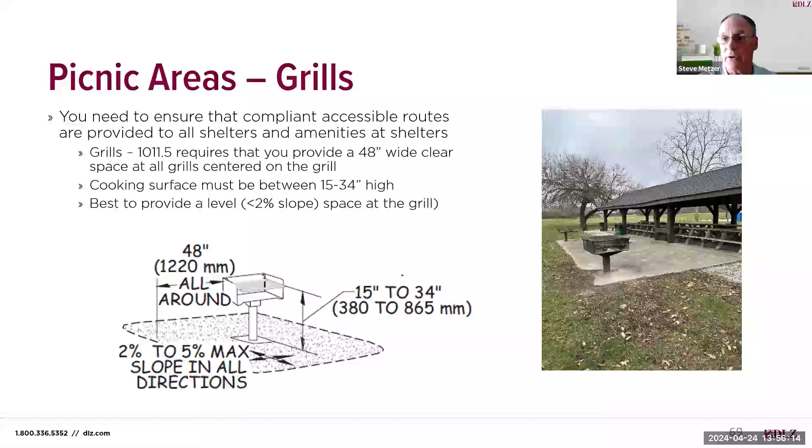The cooking surface needs to be between 15 and 34 inches high. It is best to provide that level 2% or less slope space at the grill as well, though the figure from the Access Board guide shows higher slopes, and I'm not sure if that is an error or is just a remnant from previous allowances.

Grills are often on a pad directly connected to a shelter, but almost always not underneath the cover of the shelter for safety reasons. Ensure, if that is the case, that there's an accessible route from the entry point of the shelter to the grill through the shelter between all those picnic tables.

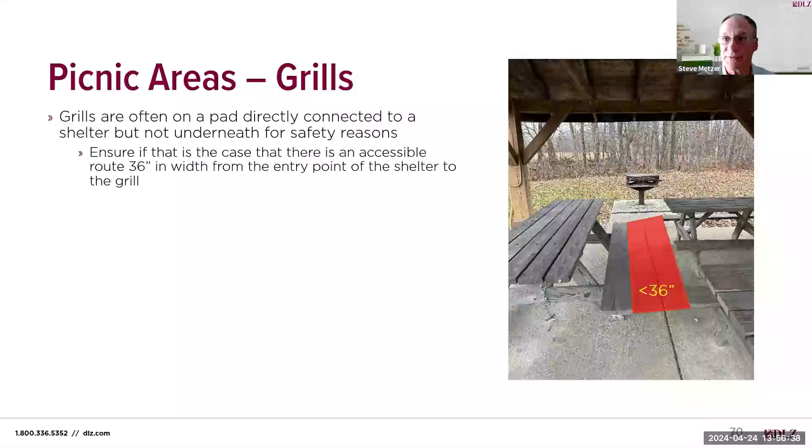If there's not a grill pad connected to the shelter, it's often a fairly easy task to add a small area of concrete to make that connection. You just need to ensure that the width is 36 inches minimum, and if there's a drop off on the edge, it might be worth considering something a little wider like 60 inches to allow a wheelchair user of that grill to turn.

In locations where the grill is not associated with or near a shelter, evaluate the available options to make your grills, at least some of them, accessible. You really have 2 options. One is providing a compliant accessible route and clear space at those grills over time as you make improvements to the park, though there are a lot of grills we see that are quite distant from an accessible route and are going to be really expensive to tie in.

Another, and maybe better option in some cases, is simply moving some grills to a different location to be closer or adjacent to an existing accessible route and provide a pad with the required clear space that connects to the grill from that accessible route.

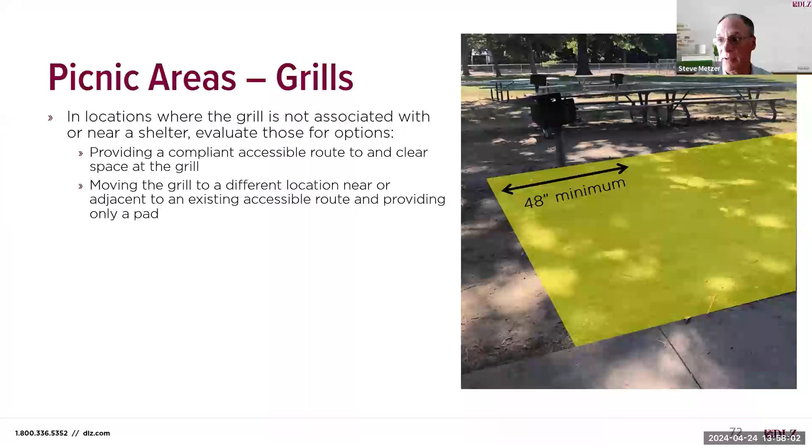In the photo on this slide, you can see there are 3 grills at this location with several picnic tables, none of which have a compliant accessible route to them or clear space, but they're really close to that perimeter path at the bottom of the photograph. By adding a pad without moving the grill, they could greatly improve conditions. And that pad at this location could even be oversized to also allow one of the picnic table ends to be made accessible and provide 1 wheelchair space minimum.

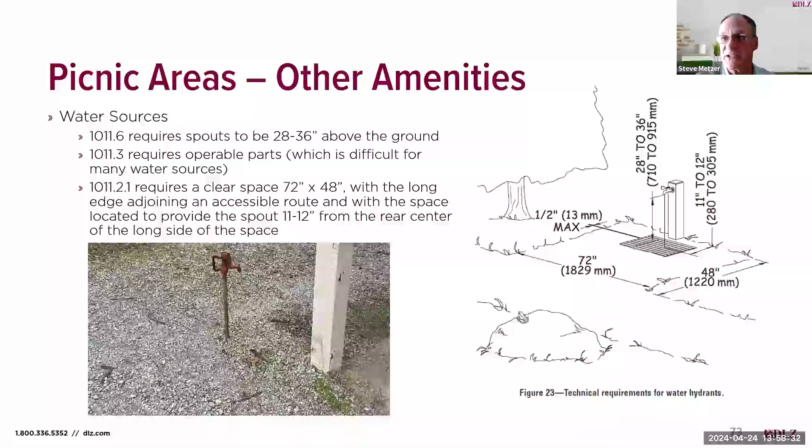Water sources are often provided at shelters. 1011.6 requires water spouts to be 28 to 36 inches above the ground with compliant operable parts and a clear space that is a little bit larger than our normal building block clear space. Admittedly, providing a compliant water source operable part is very difficult, and we rarely see them be compliant, but do the best that you can if they are provided.

If a shelter has electricity and lights, you need to ensure that at least one of the light switches and at least one outlet is within the reach range for either an obstructed or unobstructed reach, and that there is a compliant clear space at the switch and outlet.

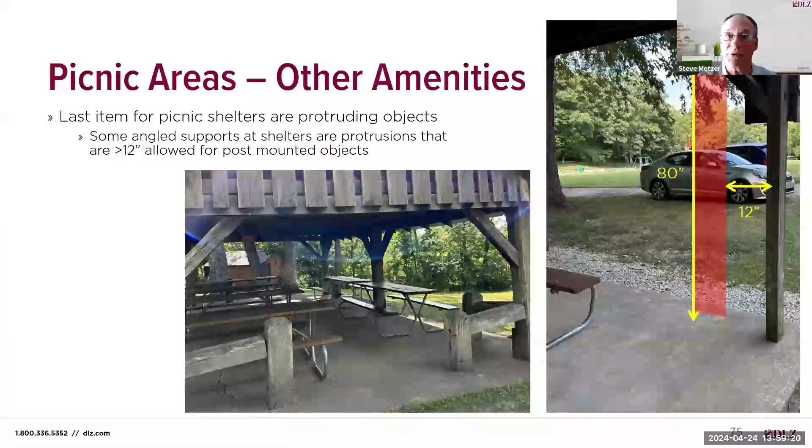The next item I'm going to talk about are site furnishings, which are in addition to the furnishings discussed earlier. Many parks have a variety of site furnishings, including drinking fountains, benches, trash receptacles, dog waste bag dispensers, and others. If you remember, we already discussed the issues with some reach range items near the beginning in the building block discussion. Many of these types of objects typically require both a clear space adjacent to and a compliant reach height from the accessible route.

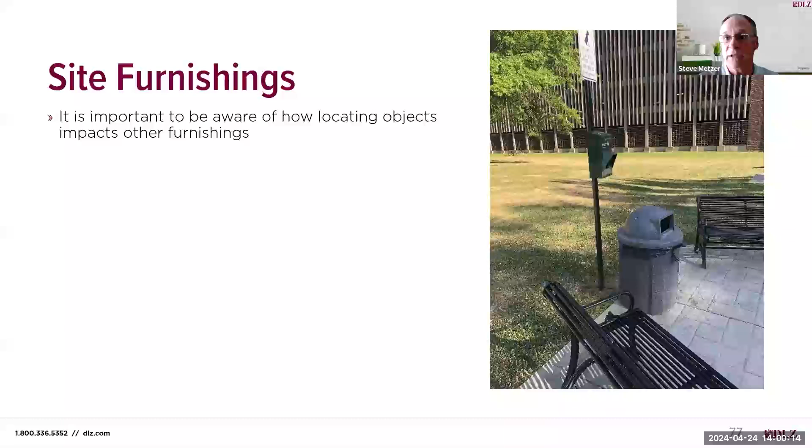Let's talk first about drinking fountains. While drinking fountains are not required by the ADA standards in any way in any facility, if provided on a site, they must meet all the provisions in scoping and technical standards. The scoping provisions of 211.2 for drinking fountains notes that for an exterior site, if drinking fountains are provided, you must provide one each that meets the requirements for a wheelchair user, which is in 602.1 through 602.6, and one that's compliant for a standing user that complies with 602.7.

So if you provide drinking fountains on a site, you must have at least two. They do not have to be at the same location, although they commonly are. The standards don't provide any guidance about travel distance to different types. So if you have a wheelchair fountain and a standing user fountain that are not at the same location, there's no requirement for how close they need to be. But consider the fact that it may not be obvious or convenient for a wheelchair user to travel a long distance, or someone with a lower body mobility impairment that is ambulatory to travel a long distance to the other type of fountain.

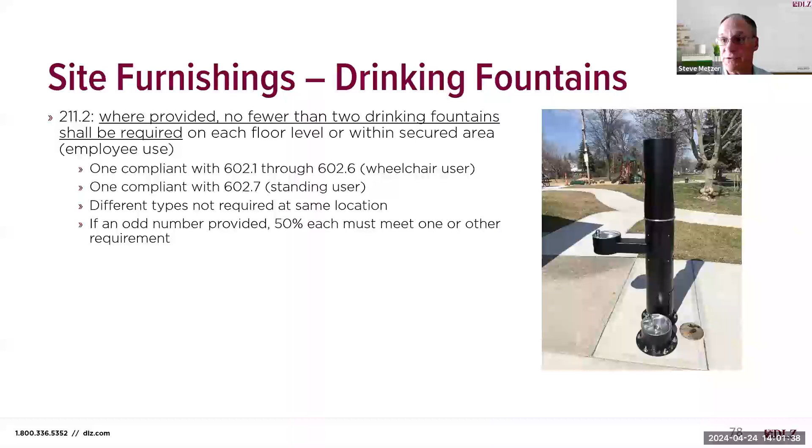If you have more than two fountains, 50% of each must meet the requirements of either a wheelchair or standing user fountain. So for example, on a really large site, let's say you had 6 total drinking fountains, 3 would need to meet the requirements for a wheelchair user and 3 for a standing user. Best practice now includes providing bottle fillers as well, which don't substitute for any type of fountain, but they do maximize the opportunities for people who use a water bottle and allows them to reduce the number of trips that they need to make for water.

I would urge everyone on this webinar to evaluate the types and locations of all fountains at your parks, as well as the model of fountains that you have. It's all too common for us to find a fountain like the one in the photograph, which provides only a wheelchair fountain and a dog bowl filler, with no other fountain at this site that meets the requirements for a standing user. If you like these post-type fountains, ensure that they provide both the high and low fountain with the dog bowl filler, and they make a lot of types of those. Fortunately, many of them can be simply swapped out using the same hookups and providing both the standing user and the wheelchair accessible heights.

Let's quickly go over those technical requirements that are found in 602. The low fountain, or the one used for wheelchairs, must provide a clear floor space for forward approach that provides the knee and toe clearance that we've talked about many times earlier already today, 27-inch minimum knee space. The operable parts must not require more than 5 pounds of force and be able to be used with a closed fist. The spout height for a wheelchair fountain is a maximum of 36 inches high. That spout must be located a minimum of 15 inches from the vertical support and 5-inch maximum from the front edge of the unit, which allows a wheelchair user to reach that water flow but not hit their head against the back wall. The water flow is also required to be a minimum of 4 inches high, again, to allow someone in a wheelchair to reach the water.

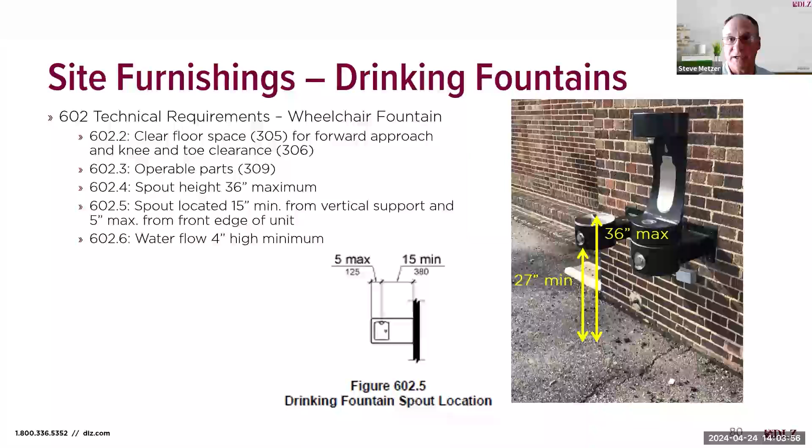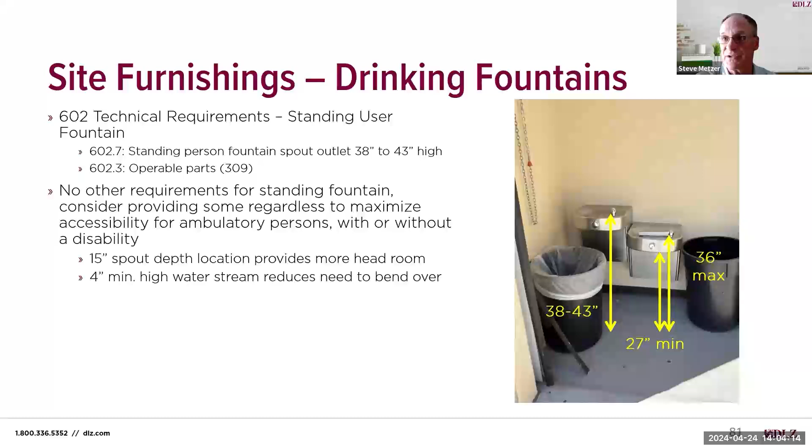The standing user fountain really only requires that the bubbler height be between 38 and 43 inches and the operable parts be compliant. There's no other requirements for toe or knee space or anything else that is required for wheelchair fountains, but it is advisable to consider including at least some additional accommodations like spout depth and water stream height to maximize accessibility.

Let's talk briefly about benches. Benches on site require a 36 by 48-inch clear space. Again, this is a little bit oversized from our previous 30 by 48-inch building block that's provided on one side, and that clear space must adjoin a compliant accessible route. The clear space must not encroach on the accessible route to reduce it to less than 36 inches. The clear space adjacent to that bench allows a companion to sit side by side with someone in a wheelchair.

There are no technical requirements for benches on sites like there are for changing or dressing rooms, but by providing an armrest and back support, it can be very helpful for persons needing support to stand, or if you provide that open side on the bench, it can allow a person in a wheelchair to transfer from their wheelchair to the bench to sit if they so choose. The best case scenario would be to provide both an open side and an armrest to maximize accessibility on benches on sites.

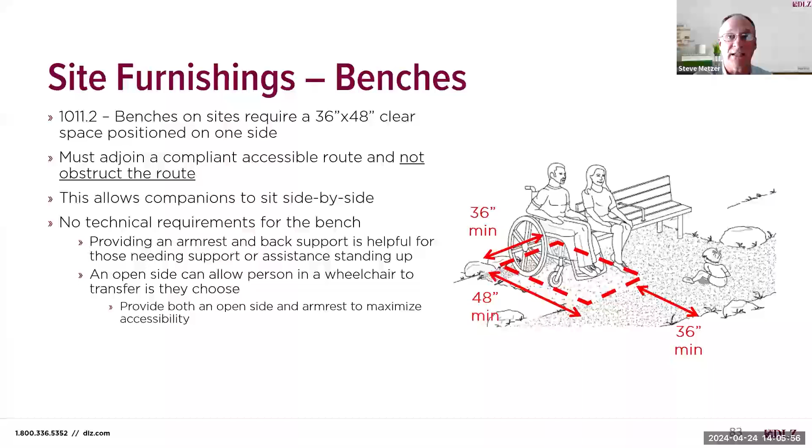Benches are commonly found at play areas, especially to allow parents to be close and observe children at play at those play structures and play areas that we talked about earlier. And they're also oftentimes located along accessible routes. It's not unusual also to see benches located within lawn areas out in the middle of a lawn area on a park. Many benches don't provide a compliant surface connection or clear space. So consider ensuring that you have at least one of each in each area that provides that clear space.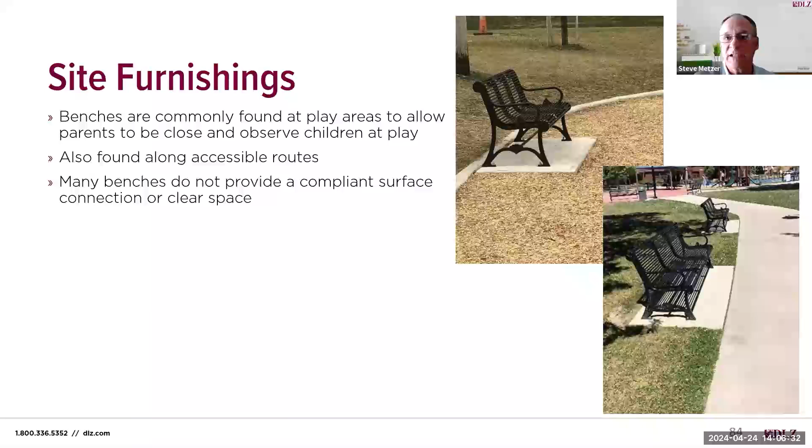Let's move on to outdoor assembly areas as we're nearing the end. By definitions in the standards, an assembly area is a building or facility used for the purpose of entertainment, educational, or civic gatherings or similar purposes. There's a wide variety of assembly areas inside of buildings, but typically on exterior sites, the most common ones we see are stadiums, amphitheaters, and grandstands.

Where an assembly area has permanent seating, there are requirements for wheelchair and companion spaces, with the number required being based on seating capacity of the fixed seating. In addition, assembly areas where audible communication is integral to the use of a space that provides audio amplification, those assembly areas are often required to provide an assistive listening system.

Let's first touch very briefly on assistive listening systems at assembly areas. As noted, the standards require an assistive listening system only where audio amplification is provided and audible communication is integral to the use of the space, whatever that means.

So here's a question. Would audio amplification at a Little League ball diamond, which meets the definition of assembly area because it has grandstands, which is used only to announce players' names, require an assistive listening system? Do you think a reasonable person would consider audible communication integral to the use of that type of facility? Personally, I would say probably not, particularly if the use of the PA system is not extensive. And many locations only announce the person batting, but some people may consider that integral.

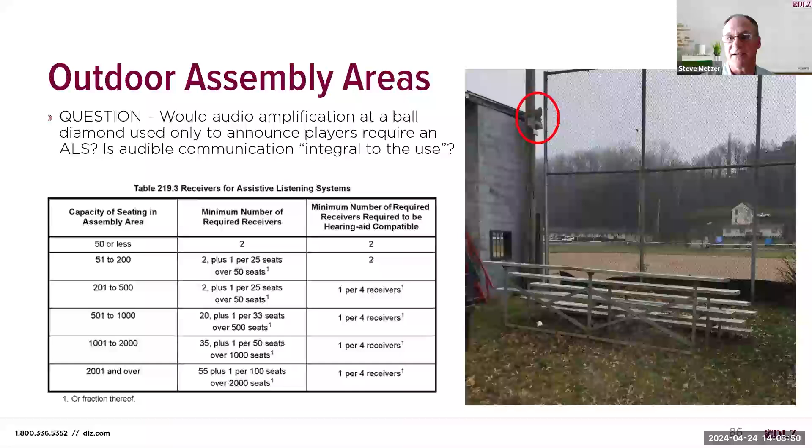As I mentioned, assembly areas with fixed seating are required by 221 to provide both wheelchair spaces and companion seats. Those spaces need to be integrated into the overall seating plan, meaning you can't put them in their own section, the wheelchair seating section. They need to be integrated and not segregated.

The number of spaces required can be found in Table 221.2.1.1. For facilities with individual seats or benches with seat identification, the counting of the number of seats is pretty easy. Often bleacher seating doesn't provide seat numbers or the number of rear ends that can fit on a bench. So in those cases, we measure 18 inches and assume that there is one seat for every 18 inches of bench seating on a bleacher.

The grandstand pictured provides 54 total seats at this tennis court, which according to the table would require 4 wheelchair spaces with companion seats. There are 4 wheelchair spaces identified with the ISA, 2 on each side that you can see circled in red, but they are not compliant. Only 2 have a companion seat adjacent, and none are on a compliant accessible route or provide a compliant clear space depth because of the grass panel that is there.

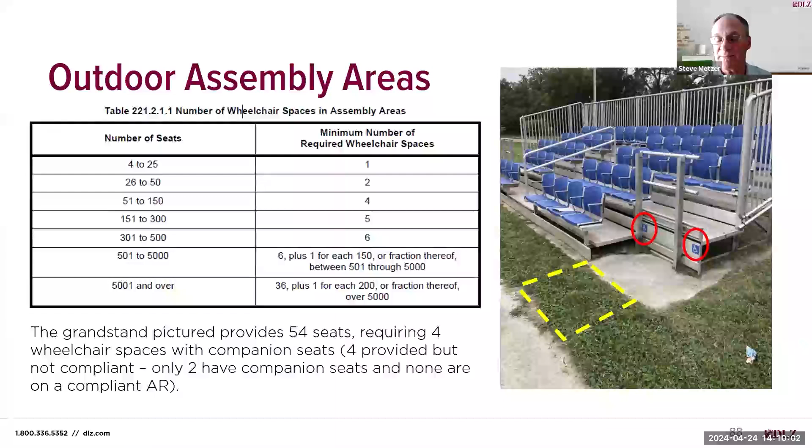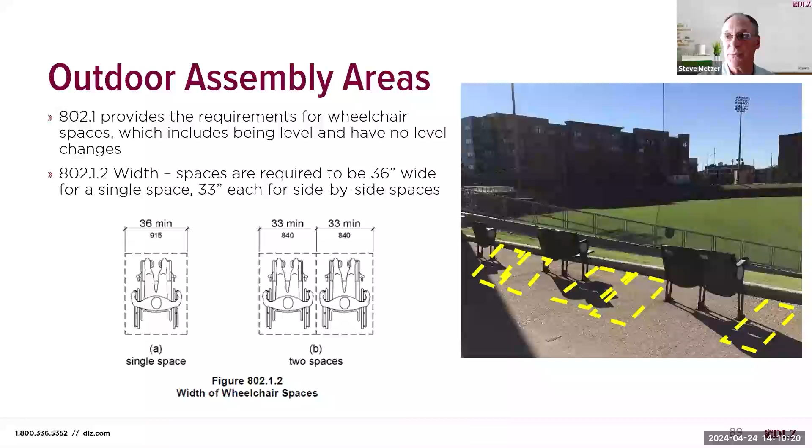802.1 provides the requirements for wheelchair spaces, which includes being level and having no level changes. The width requirement for spaces is 36 inches wide if there is one space, or if there are two wheelchair spaces side by side, they're allowed to be 33 inches wide each. 802.1.3 specifies the depth for front or rear entry, which is required to be 48 inches minimum. If entry is only from the side, that depth must be increased to 60 inches.

Note that, as I pointed out earlier, the new building code for accessibility, A117, is going to be increasing the depth for front and rear entry from 48 inches to 54 for new buildings, and it is assumed that's going to be the same for exterior sites. So again, watch for that to come out and be published as you work on making your facilities compliant.

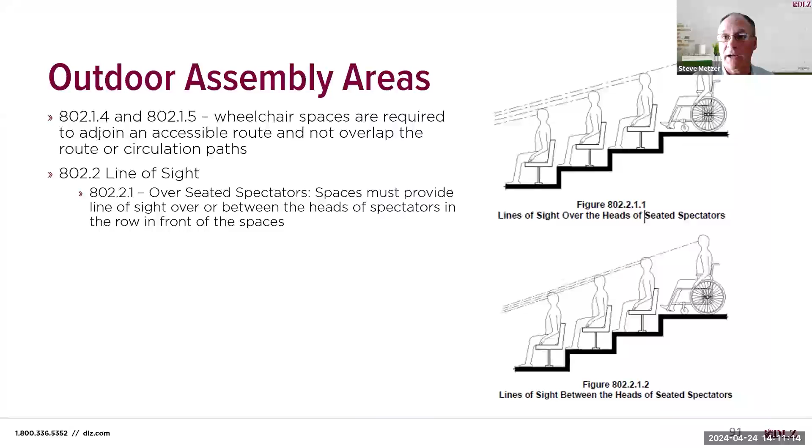802.1.4 and .5 require wheelchair spaces that adjoin an accessible route and not overlap the route or circulation paths. There are two requirements for lines of sight. One in 802.2.1 over seated spectators, and the other in 802.2.2 for standing spectators. That requires that those wheelchair spaces provide line of sight either over or between the heads of the row in front of them, whether it's sitting or standing.

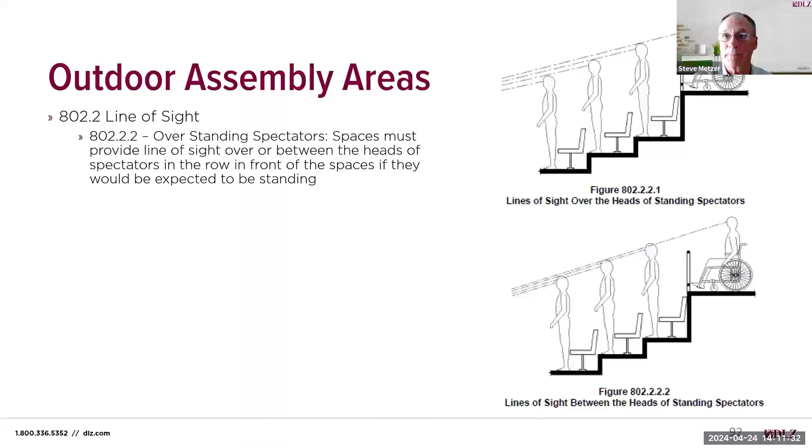Each wheelchair space is required to provide a companion seat. The companion seat must be aligned next to the adjacent wheelchair space to provide shoulder alignment, which is measured at 36 inches from the front of that 48-inch minimum depth wheelchair clear space. The companion seat must be of equal size, quality, comfort, and amenity as other seats in the immediate area. Companion seats are allowed to be movable, provided that they meet those requirements, and movable seats do provide more flexibility with accessible seating. They just have to be of the same size, quality, comfort, and amenity.

The discussion and examples so far have been showing large stadiums, but the requirements are the same at all assembly areas with permanent seating. Bleacher seating is very common at ball diamonds and other sports areas at parks, and they are required to provide the same accessible routes, clear spaces, wheelchair spaces, and companion seats as a large baseball stadium like I have evaluated a couple of different times.

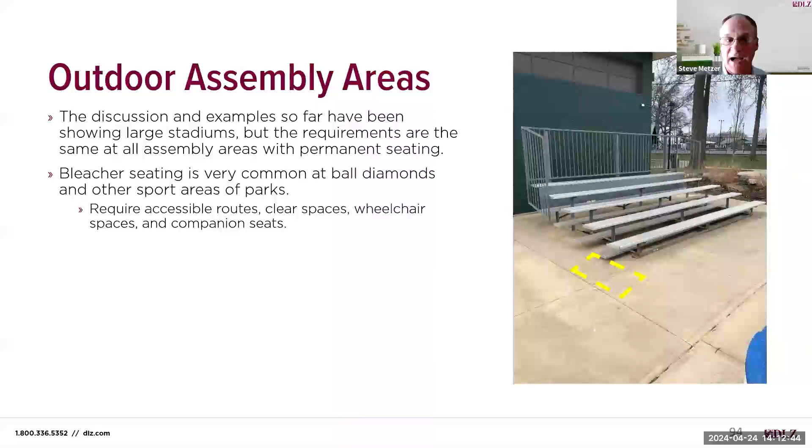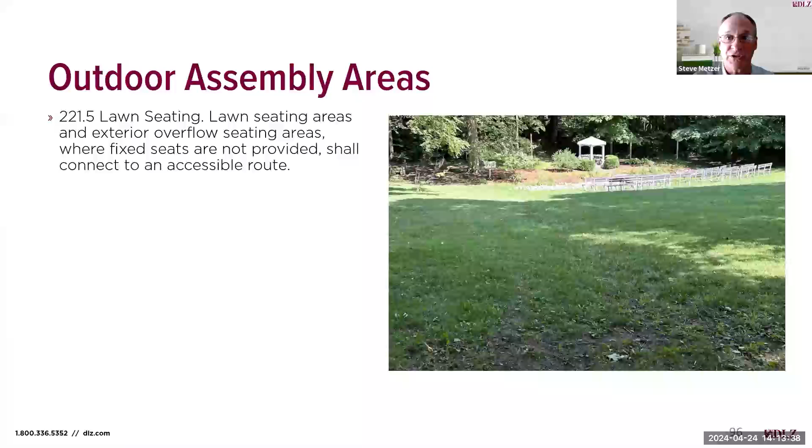221.5 requires that where you provide only lawn seating or overflow seating on lawn areas, that those lawn areas be connected to an accessible route. This would allow wheelchair access and allow them to park where they can adjacent to their companion outside of the accessible route, and their companion would typically bring their own seat if they don't want to sit in the grass. It would also be good practice to provide some wheelchair spaces at the top of this steep hill with room for a companion who could bring their own chair to sit with the person they were with in a wheelchair.

Now let's quickly move on to sport fields and courts as we're getting near the end. Sport fields and courts on exterior recreation sites come in a variety of types, some of which are used for multiple sports.

It's important to note that areas of sport activity, meaning that area where the play or practice of sport occurs, is exempt from nearly all requirements, as I mentioned earlier in the building block discussion. Where permanent seating is provided, most sport activity areas are assembly areas and require the wheelchair and companion seats that we just discussed. We already asked the question about whether you need an assisted listening system, and if you're worried about that, I would certainly recommend confirming with the Department of Justice based on your specific site if you want an answer that carries some weight.

221.2.1.4 does provide a requirement that at least one wheelchair space meeting the requirements of 802.1 for either 36-inch width and 48 or 60-inch depth, depending on whether it's front and rear or side entry, be provided in each team or player seating area. That player or team seating area can be a bench, or it could be on a sport field or in a dugout.

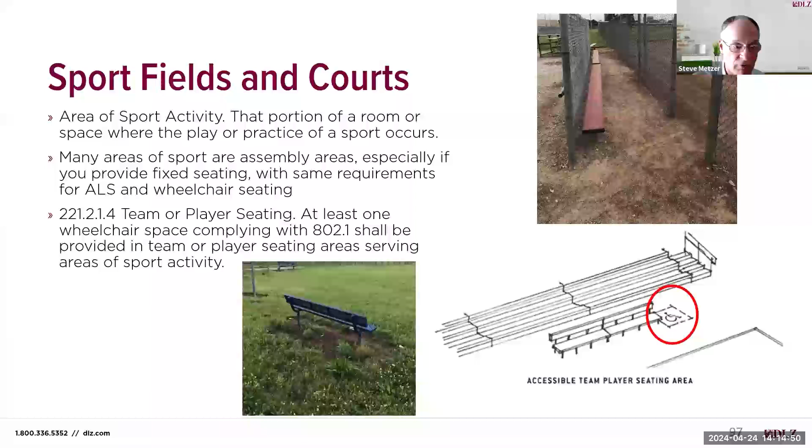Earlier, we discussed many of the basic requirements of accessible routes to sport fields and courts. We noted the requirement for court sports in 206.2.12 for at least one accessible route to connect both sides, for example, where basketball may be played. This is often done by connecting to the perimeter and having access around the sport activity area boundary. You just need to be sure that if you only have one connection, that you can get from both sides of the court on the court outside of the active play area.

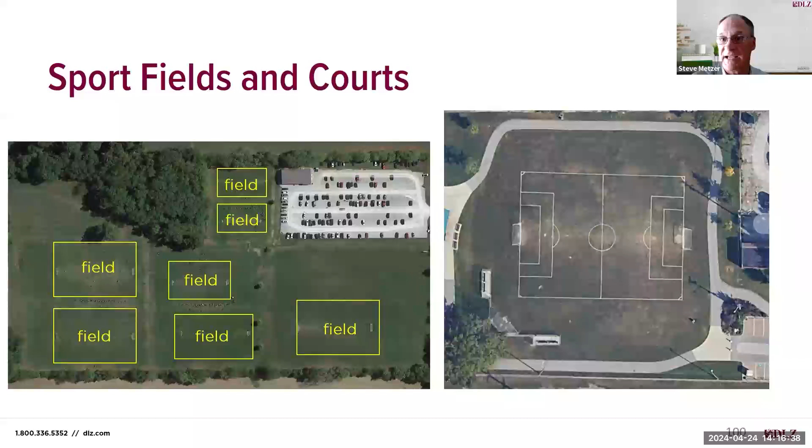Some large sport complexes, like those with ball fields or soccer, may even have concession stands, which would be required to meet the scoping provisions of 227.3 and technical requirement of 904.4 to have a 36-inch maximum height for that service counter. Any other amenities that you might have at any sport fields or courts would also need to comply with the drinking fountains and trash cans and things that we've already talked about, and ensuring that they have all the reach ranges, operable parts, and clear spaces.

All right, last, let's talk very briefly about fishing piers and platforms, since these seem to be getting placed in more and more locations. Like all the amenities we have discussed today, fishing piers and platforms are required by 1005 to connect to a compliant accessible route. Realizing some of the unique aspects of facilities over water, the standards do provide a number of exceptions. The context of fishing piers and platforms varies, with some platforms being connected directly to land with a gangway, and others, like Santa Monica Pier, having a long, wide pier out into the ocean that functions as both a fishing pier and a place for the public to walk and enjoy.

The requirements are the same for all types of platforms and piers where fishing is allowed and fishing is often encouraged. First, if there's a gangway that connects that platform to land, it can have a vertical elevation rise of more than 30 inches for each ramp, and that can also often be permitted to exceed the 1:12 running slope. This is allowed due to fluctuating water levels in many locations and the need to not have fixed gangways or platforms, especially when they get to be extremely long.

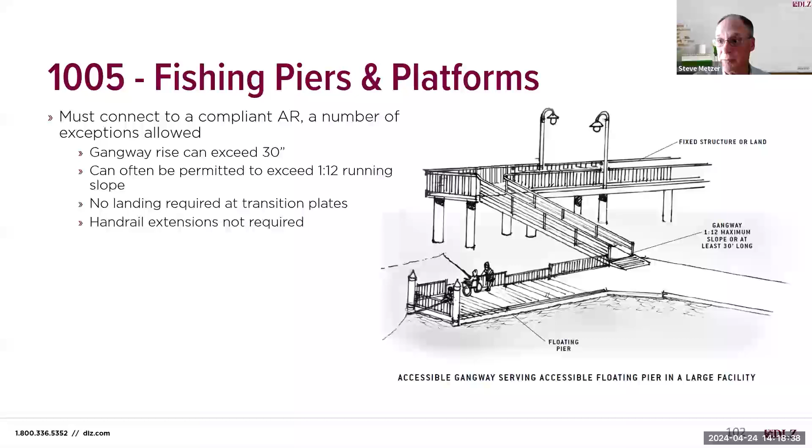If there are transition plates connecting sections of gangway, those plates are often steeply sloped to connect those different sections that are often at different elevations, and also allow for variance in changing water elevations. Those transition plates are not required to provide landings at the top and bottom. Finally, where handrails are provided, they are not required to provide extensions like handrails on most other ramps.

On the platform area itself, where railings are provided, they must provide a minimum of 25% of the total length of the fishing area at a maximum height of 34 inches for people to have a station that may be fishing from a wheelchair like this gentleman in the photograph. Those low sections of railing need to be dispersed over the entire surface of the platform or pier to account for variations in water depth, perhaps shade, and similar conditions that provide different fishing and comfort positions for the users.

Edge protection is required that is at least 2 inches high, or you need to provide a 12-inch deck beyond the edge of the railing. The fishing stations need to be 30 inches in width and provide a minimum of 9-inch toe clearance below the railing. Here again, we have a photo of a gangway that approaches a fishing platform with the blue transition plate and several fishing stations with railings provided.

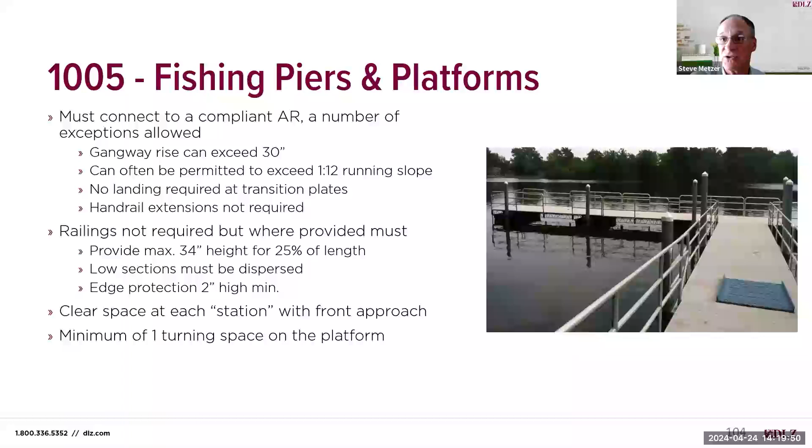Note that on the platform or pier itself, you need a compliant clear space at each fishing station with frontal approach. And you also need a minimum of one turning space on the platform. Realistically, you need one on each end of all finger piers where you have fishing stations to allow someone in a wheelchair to turn when they want to leave.

So we made it with very little time to spare, but some time to spare.

Before I go to questions, let me give you a few good resources that you should be familiar with. First, I suggest anyone with ADA responsibilities be familiar with the U.S. Department of Justice website at ada.gov. There's a lot of good information on there, and I provided links to the ADA standards that you can get from the PDF of this presentation if you want it, or you can simply go to ada.gov and find the ADA standards under the laws and regulations pull down. They also provide their ADA information, contact information at the top of the homepage.

In addition, the website of the U.S. Access Board at access-board.gov is a good resource. You can get the ADA standards from this website as well as find guidance on outdoor developed areas, which, though they're dated May of 2014, still provide some good information for some facilities not covered in the ADA standards, but do apply to federal recreation sites. The Access Board site also has some neat animations that I suggest you check out if you've not been to the site in a while. The animations are at the bottom of the homepage.

Both the US DOJ and Access Board sites include contact information for technical assistance, along with an abundance of other information. You can also sign up for email updates on both sites and receive information that's distributed on a variety of ADA topics on a fairly regular basis.

Last, the ADA National Network, which consists of 10 regional ADA centers and an ADA Knowledge Translation Center. The regional ADA centers are distributed throughout the U.S. to provide local assistance. The national network includes a lot of really good resources and reference material, and they also do provide training and topic-specific presentations. You can register online to be on their web server, and it doesn't cost anything. They have new webinars each month, and if you do subscribe to their newsletter, you will get monthly notifications of upcoming webinars and other items of interest.